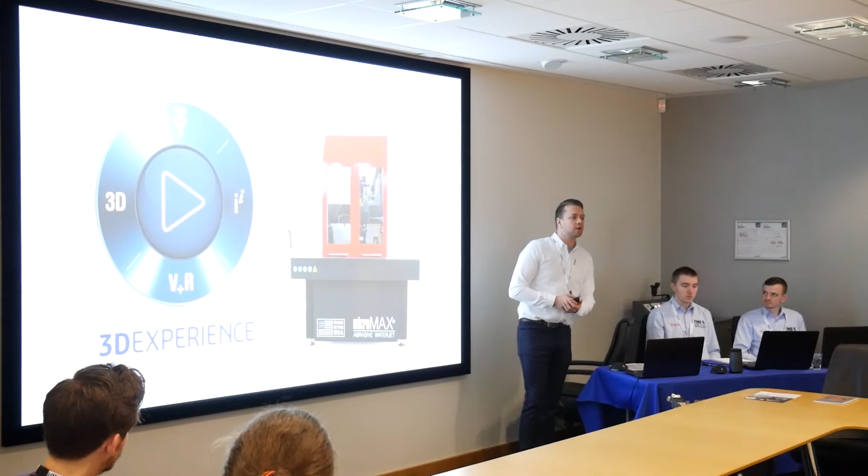Ciao everyone, and welcome to What's New in SolidWorks 2020. I am Gianpaolo Bassi, CEO of SolidWorks. Every year, we hear from thousands of SolidWorks users like you, and we get amazing ideas, insights, and requests for what's next. So of course we listen very closely, and then we deliver.

Over this past year, you have told us you want full digital continuity, a seamless process that takes you from design to manufacturing faster than ever. You want the freedom to innovate more, and you want to work with increasingly precise simulation to reduce the risks of product failure. So we got our marching orders, and we acted on them.

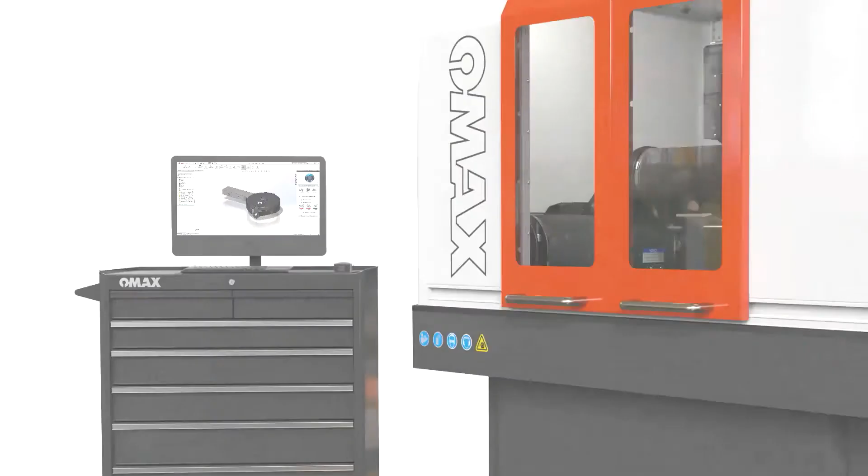And we are absolutely thrilled with what's new for 2020. It's all about digitalization and integration through a connected 3D experience platform to drive faster innovation while reducing the risk of failure. In SolidWorks 2020, you'll find three main ways we are giving you the solutions you truly want and need.

First, the 3D experience platform will deliver to you a connected design to manufacturing ecosystem, helping you manage every aspect of developing and delivering products, from ideation into the hands of your customers. You'll go from concept to completed product with unprecedented speed, and you'll do it easily and seamlessly with new and connected applications, both on the desktop and the cloud.

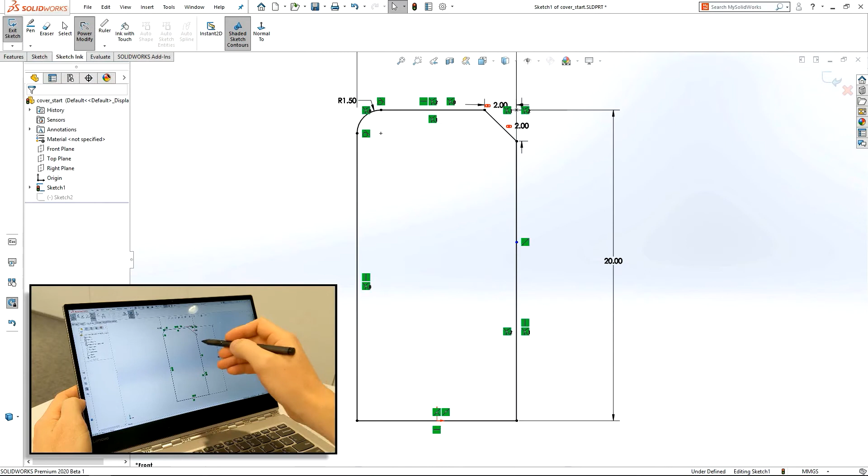We are delivering improved performance across the spectrum for stunning speed and unparalleled functionality. And finally, we are giving you streamlined workflows to accelerate time to market and reduce manufacturing costs, all while improving product quality. Get ready to dive in, discover, and get inspired by SolidWorks 2020.

Yeah, so thanks to Gianpaolo there introducing us. And I think what's really great about the SolidWorks software and how it develops over the years is so much of it comes from you guys. You using the software and giving us feedback to make subsequent releases better and better. I think that's a really good way of going forward. And a lot of what you're going to see today is all customer requested enhancements, which is really good.

Alright guys, so every year with these events we focus in on one of our customers' models and we use it throughout the day as the example file set. Last year you may remember we used the telescope, and for the veterans who have come along to a few of these events now, you may remember the Tracker motorhome that we've done as well. Well, this year's no different.

We've got the Micromax abrasive water jet cutter by the company Omax. Now, Omax are an American company, and they're largely considered to be one of the industry leaders in their field. And the way that they've achieved this is by using some of the great tools that we've got built right into SolidWorks now.

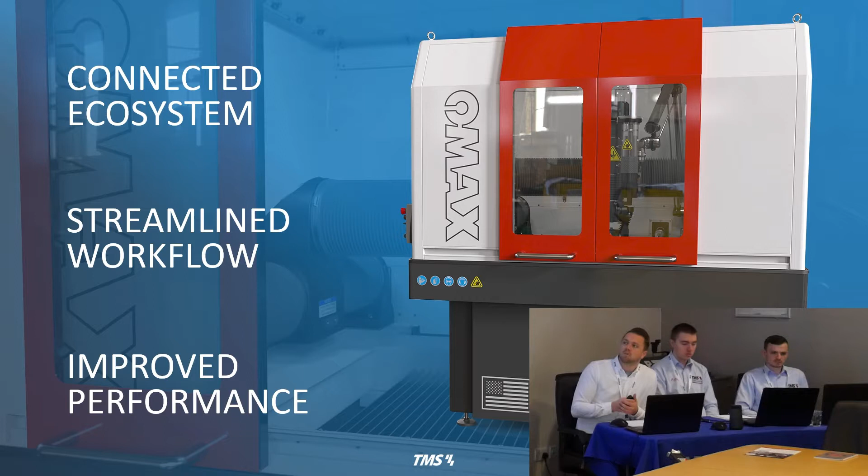So I'm going to open proceedings here by taking a look at how performance has improved for 2020. And where we're going to open on that is by speaking about detailing mode. A really nice enhancement that I'm happy to bring you guys and show you. Just looking around the room here, I can picture some of your drawings and I can see how it's really going to help you out.

So detailing mode is effectively, the way I like to think of it, almost like large design review for drawings. A couple of years back we introduced this function of large design review, and what it meant was if we had a particularly large assembly, we could open it, manipulate it, add notes, markup comments, all that sort of stuff really quick. It didn't matter how complex or how much was in that assembly, we could get in there and work with it fairly quickly and efficiently. Well, now that functionality's come into the drawing environment, if you can imagine, and that's where this detailing mode comes in.

Let's just take a look at it. So in this little video that I've prepared, I've got a fairly complex drawing, and we're going to open this up in this new detailing mode.

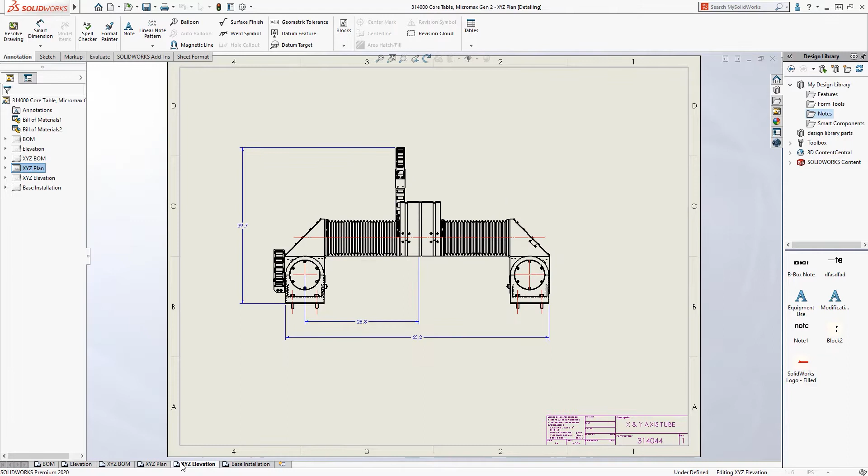Now with detailing mode, what you're going to find is that all your views, notes and annotations are completely attached and still connected to the 3D model. But the actual drawn views don't load the model, so they're really efficient and quick to work with, and it doesn't matter how complex the views are, how many sheets we've got, or how many configurations are in this.

We can add notes to it. As you can see here, I'm using the new note palette, dragging some notes in and dropping them in, company standard type notes. And equally, if I wanted to type those notes in, it's just as quick to do as well.

Now the sheet's starting to become a little bit crowded, and just as you would do with a fully resolved drawing, we can manipulate the views, reorganize our dimensions, delete them, edit them. So there is a whole lot of functionality available to you in this detailing view, and any minor edits can be carried out really quick and efficiently.

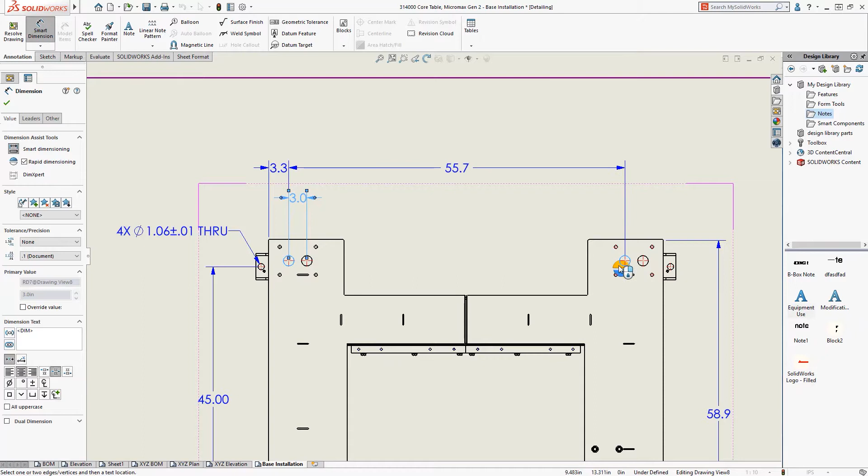So what we're doing here is we've started a new sheet, again just as we would with a standard fully resolved drawing. We'll add the new sheet, rename it, toggle through existing sheets. What's really nice here is that any feature you see, either in the toolbar or by clicking on something, if it's not grayed out, it's available to you. It's not like you click something and it says you need to load the drawing in for this. So it's a really useful tool, packed full of functionality.

Now as we go through here, what you'll notice is that we're using revision tables, symbols, we can use clouds, we can use different fonts. Basically all of this is open to us, and we're not going to lose any of the functionality of adding or editing any of our work.

And finally, just as you would expect, when we do finish this drawing off and save it out either as a PDF, a DWG or a DXF style format, it doesn't matter how we open it going forward—fully resolved, in detailing mode again, light view, or any of the other modes available for drawings now—any notes, anything we've edited whilst in this detailing mode is going to be there and available in that drawing when we reopen it.

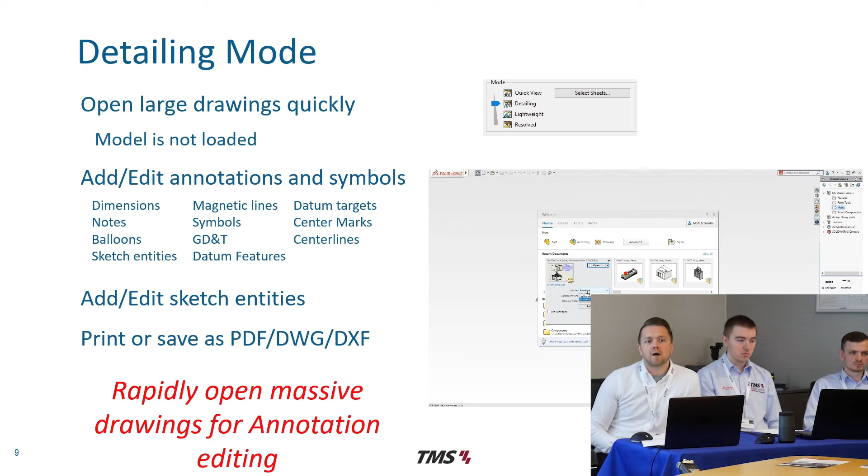So that is detailing mode, and the whole focus around that is if you're using complex assemblies, making complex drawings, and you've got some minor design edits or review to do, it's a great function to have. And I happen to know this was one which came from what we call internally an SPR, something that went to a development team and they incorporated off the back of a customer request. So really nice to see that.

Okay guys, moving forward here, what I'd like to do is rewind a little bit. Last year I actually presented this very functionality that you're looking at. So this is a 2019 feature. You're thinking if he's thrown them in already, there must not be much else to show us.

But the reason I'm rewinding here is because this tool we added, this large design review edit mode, really moved the game on in terms of what we could do with large assemblies quickly. Using large design review edit mode last year meant you could add mates to new geometry, change configurations, and move components around in your assembly. And again, it wasn't loading in all the reference components, so it was really quick to work with.

For 2020, again, the game has moved on even further. Now if you're using this large design review edit mode, we can add in different patterns. So component patterns can be added using this mode. We can also add mates to existing geometry now—you couldn't do that before. So if you brought something new in and wanted to mate it to something existing, you couldn't. Now you can.

And then we see this term, delighters. This is one we've used in this presentation a few times over—it's catchier than saying small enhancements, but they make your day-to-day workings all the smoother. And it's really the kind of things you would expect: copy paste is now supported, drag and drop supported, tab shift tab, which I use a lot for hiding and showing components, is supported in this mode. And we also have access to zoom to selection now. So yeah, just really nice little pieces.

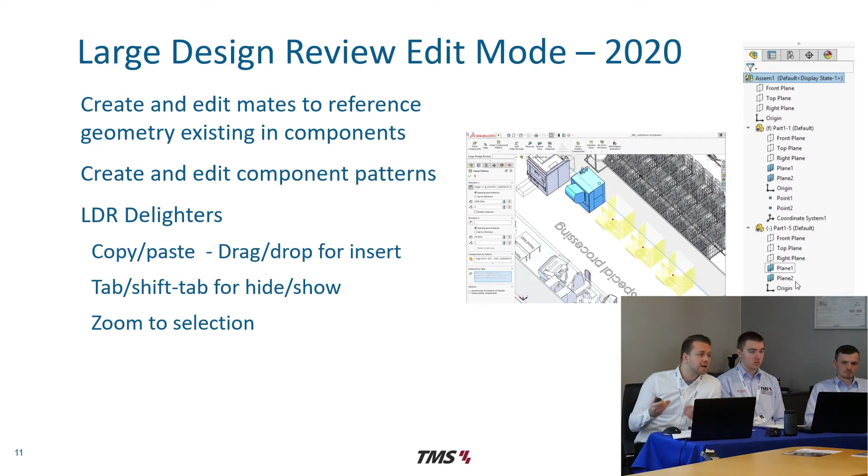Now where I'm going to finish up this section, guys, and get us on to another presenter, is with envelopes and external references. When it comes to envelopes, this is functionality we've had in the software for a couple of years now, but they're moving the game forward in terms of how you use these and how they really enhance collaboration with different team members.

Let me show you with a practical example here. When we're working on a complex assembly like this Omax water jet cutter, one problem is we often have multiple team members working on it. The current workflow would dictate that you'd need to create duplicates of this assembly and give that off to them, or break the link between two different files, give that off to them, then bring it all back together. Well, by using this new envelope functionality, what we can do is essentially envelope these components.

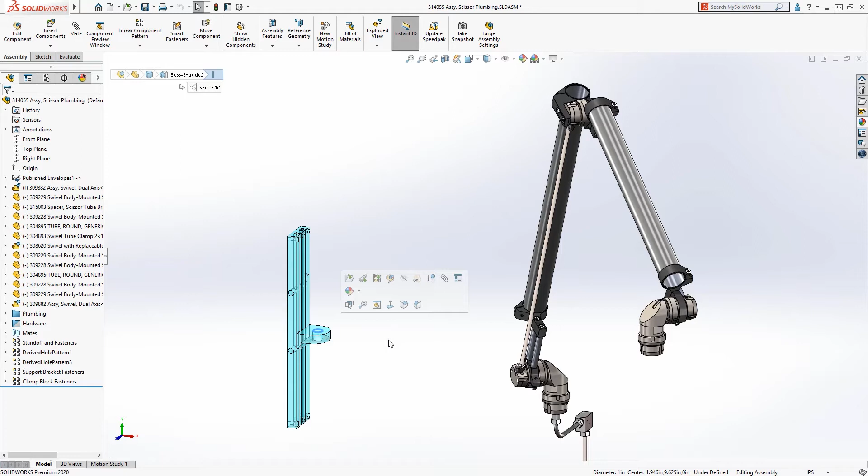We can create separate batches of them. These batches, in this case this kind of pipework system you see, we could pass off to a colleague, they could do some work on it, finish off whatever they need to do, pass it back to us, and everything comes back seamlessly in our tree, because SolidWorks knows it's an enveloped component. So the focus here, guys, is being able to work in collaboration with your team members faster and easier. You don't need to create duplicate assemblies, you don't need to bother about the management that comes along with that, which can be tedious and difficult at times. So enveloping components is all the more powerful in SolidWorks 2020.

So guys, we kind of flew through that one. That was the improved performance section. Now we're going to have a look and see how the workflow is becoming more streamlined than ever with SolidWorks 2020. And with that, we'll go over to Kieran and let him show you.

Now, again, to break this down into some bite-sized chunks, we've broken this down a little bit further, and we're going to have a look at the assembly improvements, then the part, and then the drawing ones. But we'll start off with the assembly ones that we have, and there's a good number of them.

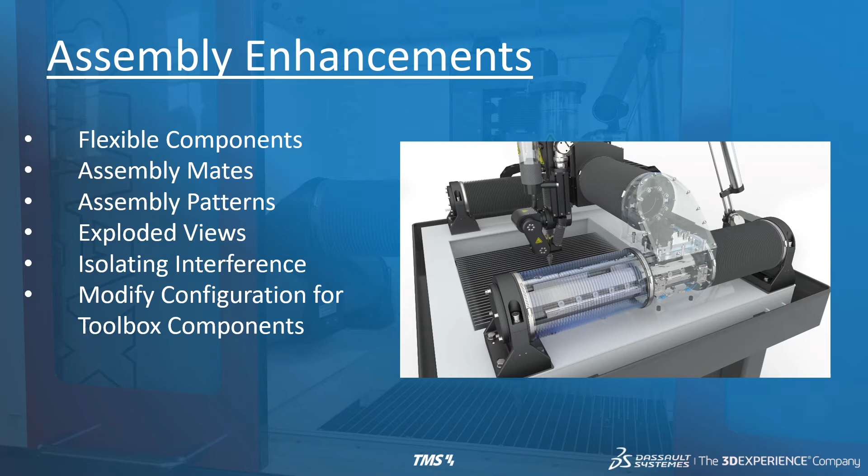We're going to start off looking at flexible components, and this is actually one of my favourite enhancements that comes with 2020. It really adds a great bit of functionality to your assemblies. But let's see what it's all about.

Now, with flexible components in our assemblies, I'm pretty sure most of you by now have commonly used flexible assemblies in order to get movement within your top level assemblies, that sort of idea. But how can we go about doing that for single components, the likes of any bellows, springs, things like that? How can we go ahead and get that geometry to update with any moving components in our assemblies? Well, that's basically where this feature comes in. But let's take a look at it.

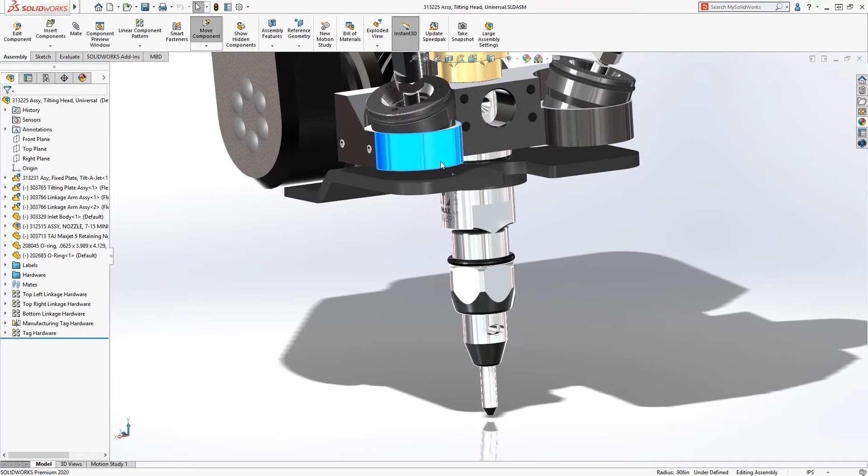Now, to take a look at this one, we've got this section of the Omax water jet, just the tilt-a-jet head of it. The way that it works is it actually rotates round at calculated angles in order to offset the taper of the abrasive water in there. So you can see how the mechanisms come into play at the top level assembly.

Now, like we said, in order to get this functionality, we do need to have a number of sub-assemblies in there which are made flexible. But again, how do we go ahead and add in some flexible components? For example, if we go ahead and add in some bellows in this case to protect the moving parts, make sure they're not going to break, anything like that, how can we go ahead and make them flexible?

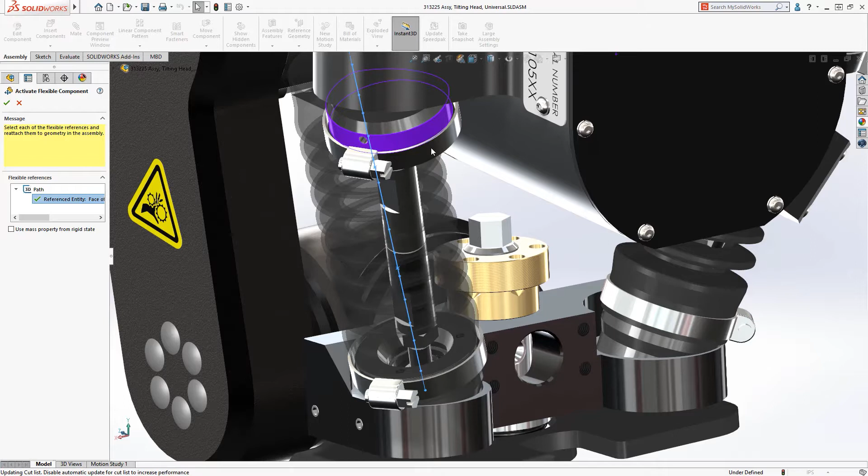Well, if we go ahead and add those in, what we now have when we select the component is this option to make part flexible. The way that it works is we can go ahead and select the reference that we want to go ahead and update with our assembly. In this case, it'll be the 3D path of the bellow itself. And then what you'll notice when I click OK is that the geometry starts to update.

Every time I go ahead and move the assembly after that point, the geometry starts to update with that. Likewise, we could go ahead and do the exact same for the opposite bellow here, again just using the exact same process, making the part flexible and selecting the reference that we want to update the geometry.

Now, it doesn't matter whether it's live hinges or springs or bellows, anything like that. The opportunities are pretty much endless with this one, guys, and it's a great way of actually starting to visually validate your models when it comes to the top level assemblies. It makes it a lot easier to see.

Now, a few additional points when it comes to flexible components. As you saw, we can go ahead and remap those external references, like the 3D path of the bellow itself. But what we also saw there was that multiple instances are actually supported as well, so we went ahead and applied that flexible part to both of those bellows. However, it's still just looking at one individual part in there. It's not going ahead and creating any duplicate files, duplicate configurations or anything like that. It can simply use one part and update them independently depending on how that geometry changes.

The other useful one as well is we can go ahead and control the mass properties in there, because of course as the geometry starts to change, the mass of the component could potentially change along with it, and of course that wouldn't happen in real life. So what we can do is go ahead and set the mass properties of that specific component to simply reflect its rigid state in there. So again, we're not having any change in masses in the top level assembly. And finally, we do also have some custom property support as well.

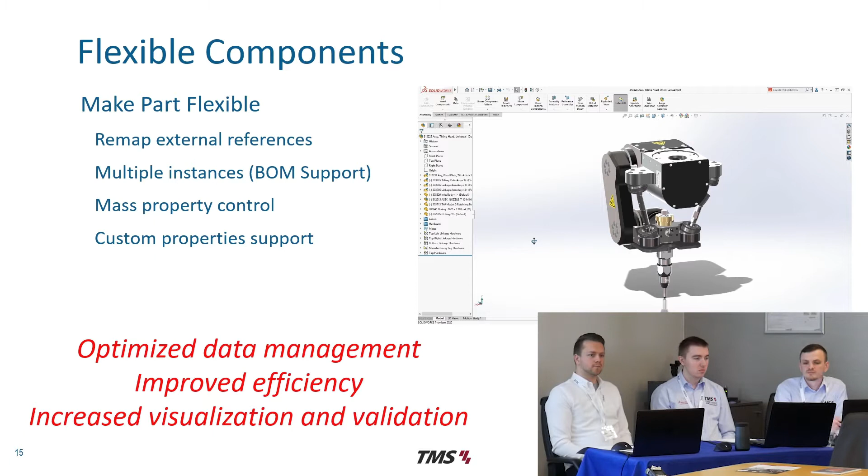The next little bit is looking at the improvements that we have with our assembly mates, primarily looking at our Quick Mates toolbar here. And we've got a few nice little additions with 2020. That being, we now have the incorporation of our limit mates in the Quick Mates toolbar. Likewise, we also have our slot mate with our position constraints as well.

Same as the slot mate, we'll also have the width mate with the constraints as well. A flip alignment pop-up button. And we also have a flip alignment for our width mate in the right mouse button click now, just making it a little bit easier to control.

Now, just to see these in action, again, we've got a little example for you here. Now, the Quick Mates toolbar has actually been around in SolidWorks since 2014, and it's a great way of trying to bring your assemblies together, focusing on the graphics area alone.

Now, if we go ahead and look at this example, what we want to do is go ahead and mate this washer into place with this slot. Now, with the slot mate on the Quick Mates toolbar, we can go ahead and select it and position that about the slot as we want, in this case in the centre.

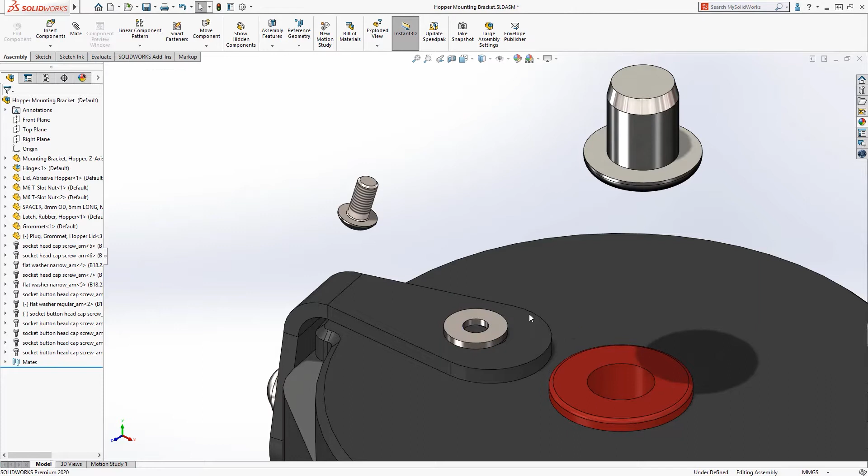We then want to go ahead and mate this bolt into position, and we've long been able to do this with the centre profile mate. But up until this point, we've had no way to flip it without going in and editing that mate. But now with this flip mate alignment pop-up, we can go ahead and do it directly from the graphics area.

Then, just like our slot mate, we can then go ahead and add our width mate in here, and again, we can control that positioning from this constraints drop-down. Now, again, we can use this flip mate alignment in order to flip that round, because up until now, what we need to do is go ahead and suppress that out, rotate the component round to the right direction, and then unsuppress it again so it suits what we need. And as we mentioned, we also now have that flip alignment in the right menu click as well.

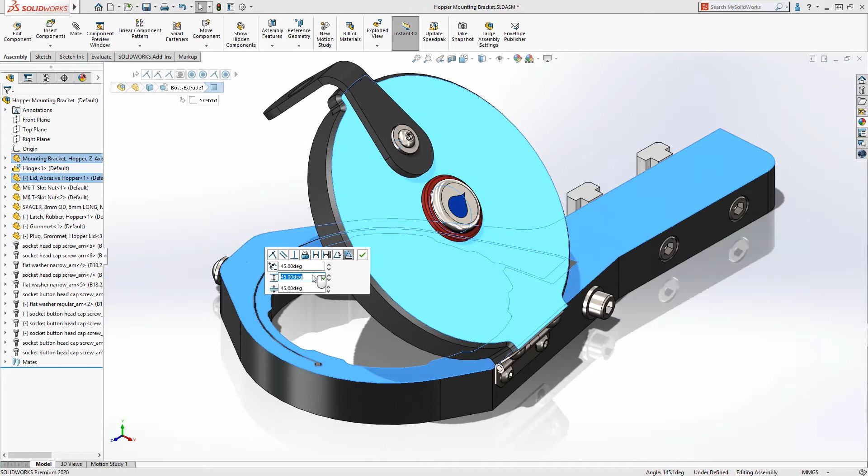Finally, we want to go ahead and add a bit of flexibility to this assembly so we can see how it moves. And from a Quick Mates toolbar, again, we can make use of these limit mates here, where we can quickly and easily add in our minimum and maximum values, so we can then add in the travel of the component that we would expect in real life as well. And again, we can go ahead and check that out just to make sure it's working correctly.

So again, with these little additions, it's just adding a few more options in there, making your assemblies come together that little bit quicker, and it's a little bit more user-friendly as well.

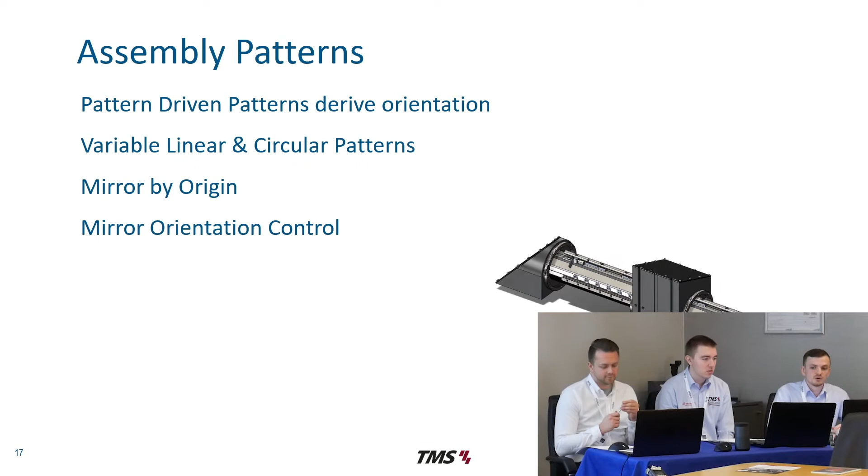Next up, we've got our assembly patterns. We've got a few little additions here. Instead of explaining all of them, we're just going to jump right into the example. Component patterns are a great way of bringing multiple components into your assemblies without having to mate them all into position one at a time. And the first one we're going to look at is the pattern-driven pattern.

Now, with 2020, what we have is the ability for Hole Wizard holes to detect the orientation when it comes to patterning. Up until now, you needed to create multiple patterns or skip instances to achieve that. But it now takes into account that orientation, so it makes it that bit quicker again.

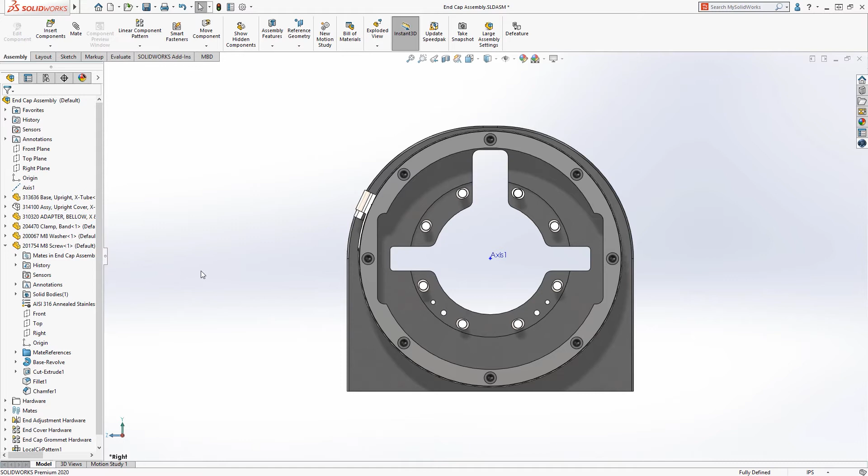Just like with our component patterns, we also have some enhancements to our circular and linear component patterns, in that we can control each of those individual instances. You may be familiar with this from the part environment, but it's just recently been added to the assembly environment as well. So if we've ever got components at irregular spacings, we can nicely and easily manipulate that within one pattern command instead of multiple. Again, it just makes it a bit easier.

Lastly, let's look at the mirror components pattern. Up until now, we've had the options to mirror about the centre of a bounding box, or even the centre of mass. However, sometimes it just doesn't get it quite right. Now, with SOLIDWORKS 2020, we also have the ability to mirror using the component origin. So if we've got any asymmetric components or anything like that, it makes it that little bit easier to align it correctly.

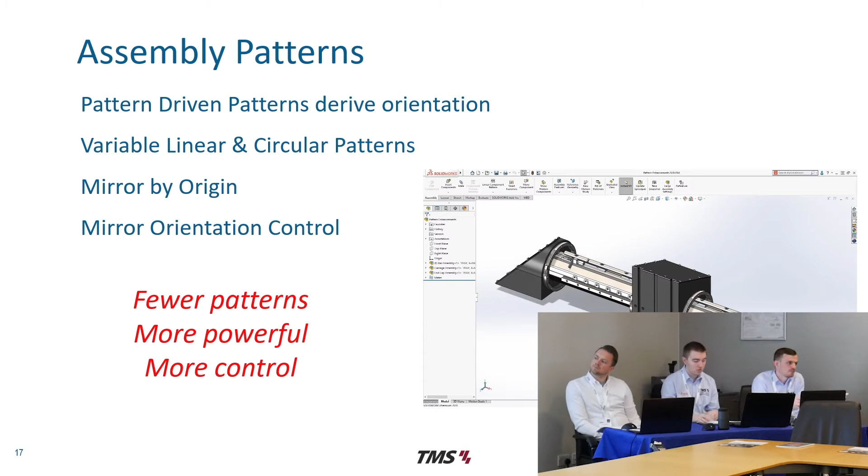As you saw from the image there, we also have some new positioning toggles at the bottom, which are more visually appealing in showing the correct orientation. So again, we can now create fewer patterns as they're more powerful, and we have more control within them as well.

The last section when it comes to assemblies are these little additions at the end. We don't have videos for them all because, believe it or not, we'd be sat here all day if we did. What we'll start with is modifying configurations of toolbox components. Now we have a simple right-click on any of these toolbox components where we can create a new configuration, swap configuration, or even suppress out multiple toolbox components at the same time, making it a lot easier to customise your assemblies from one right mouse button click.

The next one is the reuse of multi-body part explodes. Explodes have been within the part environment for a while now, but what often happens is you have a multi-body part, you create the explode view, that's great. We put that part into an assembly, but we want to make use of that multi-body part explode we've already got. Up until now, you needed to create all of that again. However, with SOLIDWORKS 2020, we can now, with one check of a box, select to bring in this exploded part, or multi-part explode view, and make use of it in an assembly. Again, just saving that little bit of time when we're pulling our assemblies together.

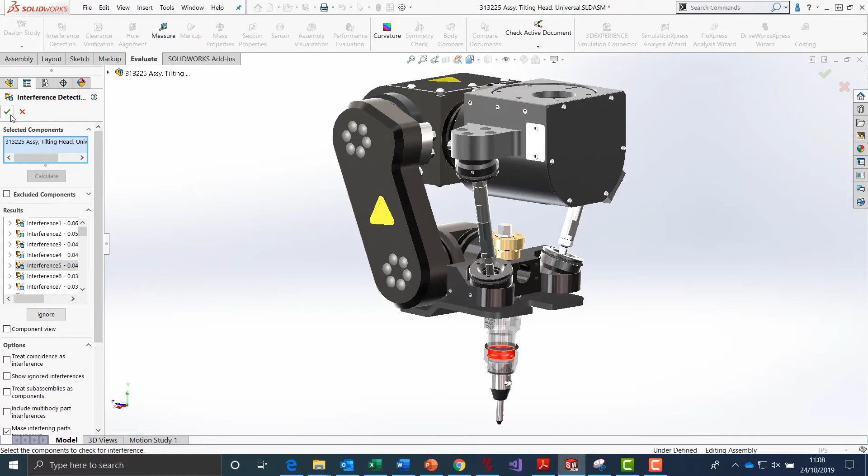But now, with a right mouse button click, we can isolate that interference when we click OK. So when I click OK, it's going to single out that interference that we have, so I can then look at those individual components and make some judgment calls - is that expected, is it not? Or I can even make some geometry changes right here in my graphics area. Again, it just makes that functionality a little bit easier.

Now, that pretty much sums up the assembly enhancements. Like I said, that flexible components one at the start is definitely one of my favourites, and if you ever get a chance to try it out, I'd highly recommend it. But now we're going to move on to the enhancements for parts, and I'm going to pass you over to Craig for that.

Thanks, Kieran. So where Kieran left off with his favourite enhancements for assemblies, I'm going to leave my personal favourite in parts to the end, looking at structural systems. I'll take you through some enhancements to the user interface when working with parts, look at enhancements for both touch-enabled and non-touch-enabled devices, how we can add in markups a little differently, repair some fillets when we get warnings in our tree, and that sort of thing.

So let's get started looking at the user interface. The UI in the part environment has had a couple of enhancements just to make day-to-day use that little bit easier. Let's get started with a quick demonstration.

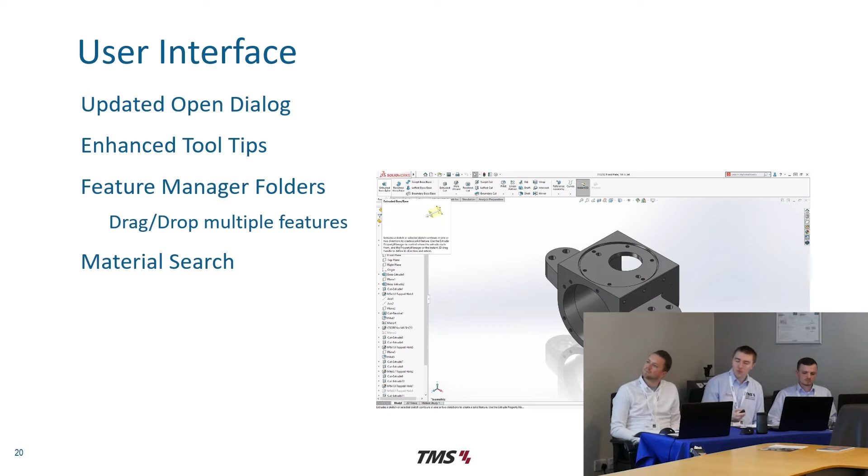When opening up a file, the file open dialog box is now a little bit wider, so we can see all the file extensions, and you can rearrange them to make it easier to find the file type you're wanting. We now have a new mode selector for how we want to open our part or assembly, with quick options to the side relevant for each mode. Users also like to customise their interface, so now when showing and hiding different tabs, there's a new flyout appearing at the top of the screen to see them.

Customers also sometimes wonder, when new to using SOLIDWORKS, what some features actually do. So there's now new previews for a number of features, but I'll explain that a little more in the next slide, where we'll show some examples.

Customers also like to create and use folders in the Feature Manager design tree, and now you can drag multiple non-contiguous features at the same time into that single folder.

When applying a material, sometimes it can be hard to find the exact one, not knowing which folder it's in - is it a SolidWorks default material, or have we created our own custom material? Now there's a new search bar up at the top, so you can type in a couple of letters for a material and get access to it quicker. Particularly useful if you're doing a simulation, just to make picking that material quicker.

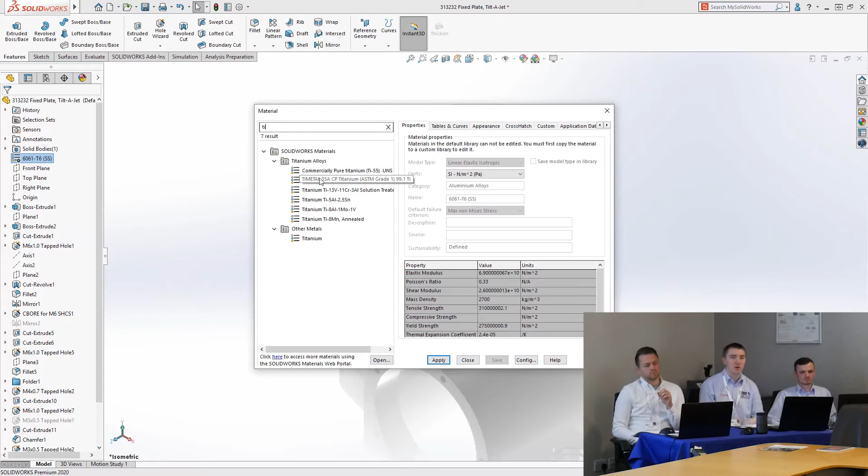So a couple of enhancements just to the UI side of things, to improve user interaction and speed, allowing you to get to your work that little bit quicker.

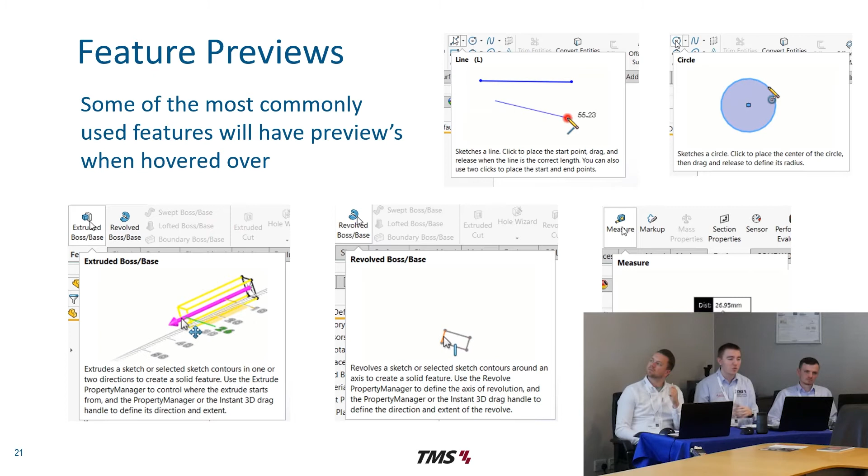I've got an example of some of those features that have previews - what they'll do is, when you're new to using SolidWorks, if you hover your mouse over a number of different features, it will start to play a little 5 to 10 second animation showing what exactly that feature does. So if you came from another CAD software, you might wonder what a revolve is doing, or what the measure tool is used for. It will give you previews of them, and you'll get more familiar with the software as you go.

Sketching in SolidWorks also has a number of enhancements, both for people with touch-enabled devices and non-touch-enabled devices. Let's get started with a little demonstration of that.

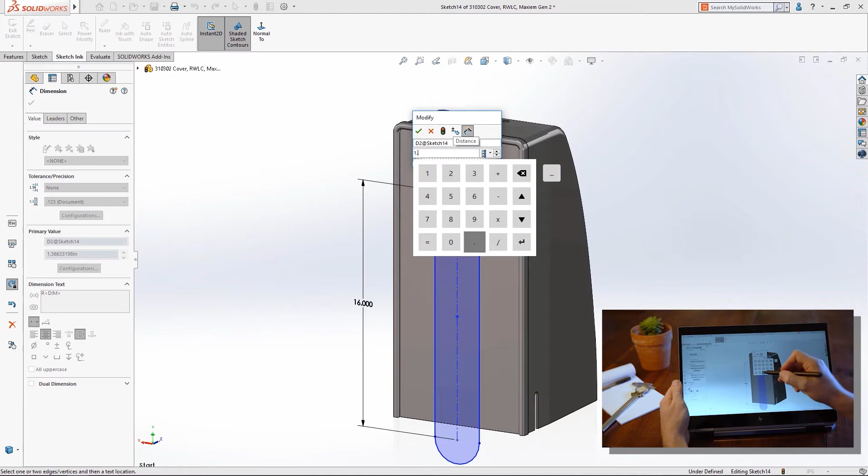SolidWorks 2020 introduces new sketch enhancements, so let's look at some of those. When using a touchscreen device such as this HP ZBook Studio, we can quickly and easily draw - with enhancements added in 2019, this slot, just by drawing it with our pen. But when adding dimensions, we still had to enter them with a normal keyboard. Now in 2020, we can just use the on-screen keyboard to type in those dimensions, making it that little bit easier.

Making edits is easy using the command manager up at the top, and we can customize that as we need, such as using convert entities, or adding quick access to fillet and chamfer. But we can make that even easier in 2020 using the new power modify option, so we can quickly trim out material by starting our sketch with a little squiggle when drawing.

We can draw a little curve, a little straight line over an edge, and that will automatically add in the fillet and chamfer, and we can jump between the two as needed. Again, we'll start with a squiggle to remove material, or if we need to split an entity, we just draw a little X on top of that sketch entity, and that will split that line.

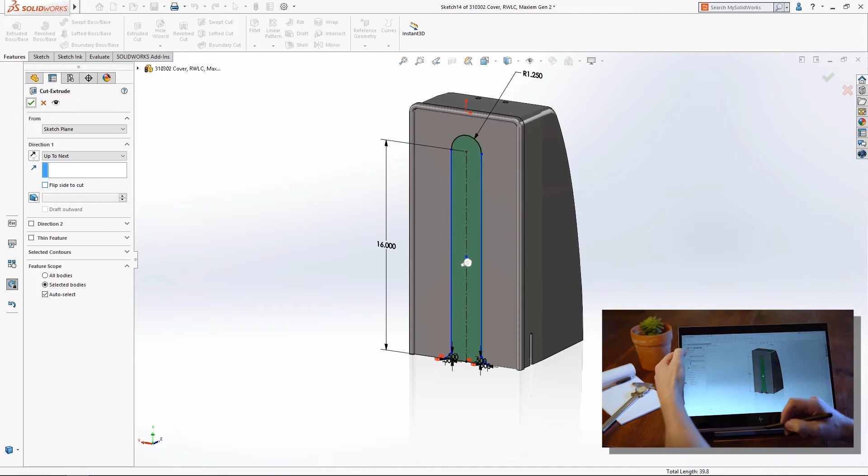So we've got our shaded contour, and if we start with a double stroke, we can create an offset of a particular entity, or if we do that over a shaded contour, it will create a contour that we can then use our cut extrude to cut away some of the material we might need.

I'm then going to look at the curvature of the back section of this part using my zebra stripes, and we can see that it doesn't quite line up perfectly.

Now when I edit that sketch, we've previously been able to add things like tangency or curvature continuous, so our C0, C1 and C2. But now in 2020 we have the option for C3 continuity to make that edge a little bit smoother. We can see that nice and easily when we show the zebra stripes.

But maybe I didn't quite like that change, so I'll hit undo a couple of times, and then maybe redo, jumping back and forward as I'm making design changes. In the past, if you hit undo, then come out of a sketch or feature, you'll probably have noticed that redo button's been greyed out. So there's been a number of enhancements to both redo and undo, so you shouldn't lose any of your work when jumping back and forward in and out of multiple features.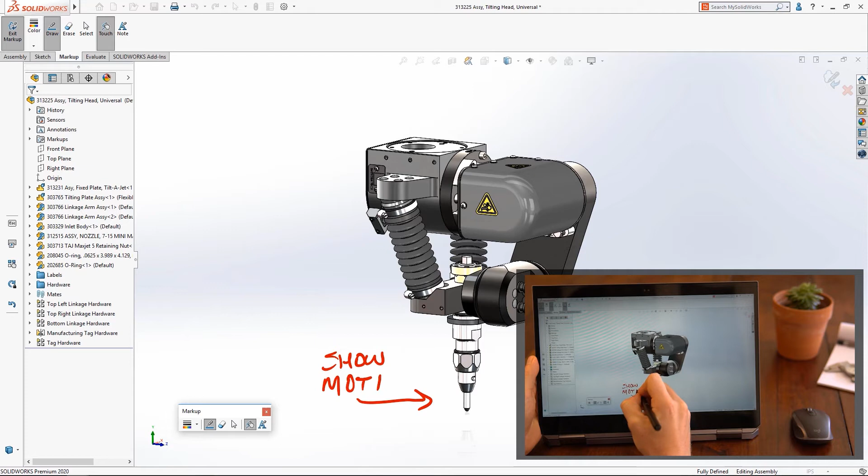Markups are a great way to communicate and collaborate directly inside a SOLIDWORKS file. With SOLIDWORKS 2020, accessing these tools is even easier than before, with its own toolbar up at the top and a command manager tab to go with that. You'll notice while in touch mode, the icons are now a little larger, so it's easier to hit on the first try.

As always, markups are stored in the markups folder on the left of our Feature Manager design tree, and we can quickly orientate to the orientation a particular markup was created in, should we need to make changes. We can highlight multiple markups at the same time, and once finished we can export that markup to additional formats, like PDF, JPEGs, TIFFs, those sort of things.

What we can now do in 2020 is create our markups in the drawing environment. Previously it was limited to parts and assemblies. So in the drawing environment we use that same intuitive interface we had in parts and assemblies to start drawing and making changes as needed. We can also hide and show particular markups from our feature manager design tree, or from our heads up toolbar we can hide and show all of those markups at the same time.

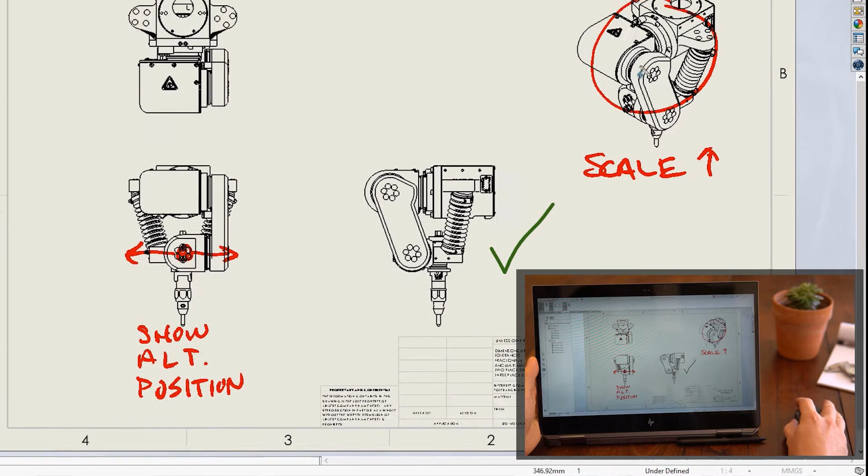But say we don't have a touchscreen device, now in 2020 we can just use our mouse, pick the colour of the markup we want to draw, pick the size of our line, and then just draw away with our mouse, making it that bit easier to get markups in there. I've seen a lot of customers sending us drawings, data, or issues where they'd use the snipping tool in Windows, then stick it into Paint, trying to draw on particular bits.

Why not just do it directly inside SolidWorks and export them once you're finished? It makes things that bit easier without having to open up a separate program. That's enhancements to markups, which I think more and more people are going to start to use because it makes drawing things that much easier.

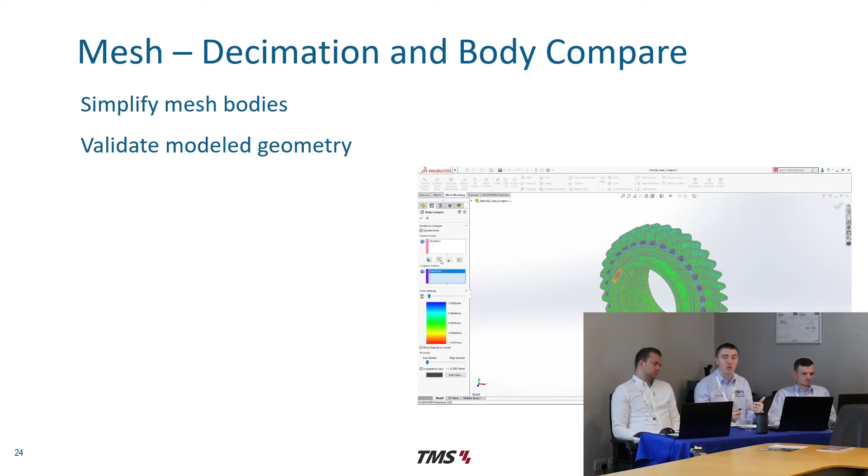A lot of customers end up also working with mesh data. Maybe you've got a scan that you've done yourself, or a client's created a scan and sent you some mesh geometry that you've got to then work with in SolidWorks. There are a couple of enhancements to help with performance when working with it, and the ability to directly edit that mesh geometry if you don't want to create a native SolidWorks file.

We might have something like this complex mesh body that was created from a scan of an Artec 3D space spider, and even with some of the most advanced computers it can be a little bit difficult to work with these.

But now in 2020 we can use a new decimate mesh body feature, insert a percentage decrease, and it will decrease the complexity of that mesh without actually losing any of the physical geometry. We'll see on the right a little preview of the before and after, just to make the performance a little bit better.

When we want to actually create a native SolidWorks model to go with it, we can now use the new tangent face selection option, which allows us to pick up those tangent faces in the middle, allowing us to create an axis in the centre, which we can then use for some of our revolved features to create our 3D geometry.

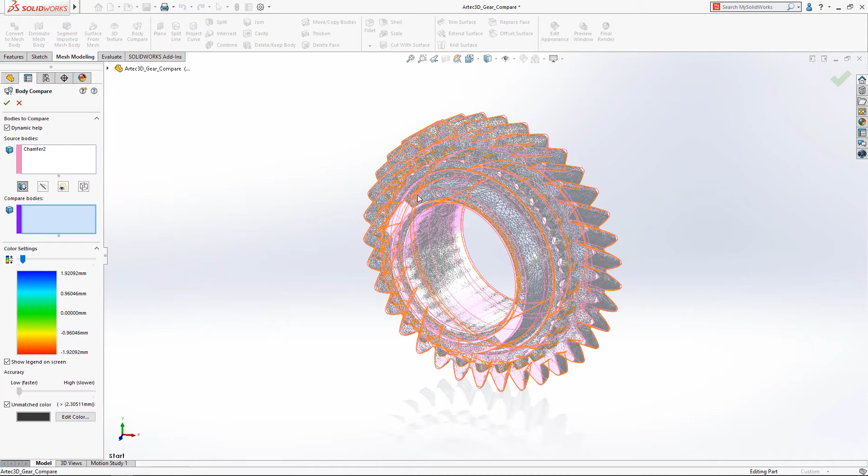Once I've created that 3D geometry, I might want to compare that to the original mesh data. So we can use the new body compare option, select our mesh geometry and the model I've created, and then we get a visual heat map of how those two compare with each other, showing what faces or features I might need to edit slightly.

We can see those sections, particularly in red and blue, that are standing out where we might want to make a little bit of tweaks - just 1 or 2 millimeters of difference between the two. So tools like decimation and body compare just make working with mesh geometry in 2020 more effortless than it was previously.

What if we don't want to create our own geometry? What if we want to just directly edit the mesh geometry that we have? There are a couple of extra tools where we don't need to convert anything beforehand.

The need to directly edit mesh geometry, such as this STL file, is becoming more and more common with customers. In 2020 it continues to expand on that already rich mesh editing feature set, so we can now apply fillets in the same way we would with a native SolidWorks file, and edit that feature to convert from a fillet to a chamfer or vice versa as needed.

2020 now supports more advanced editing tools, such as if we want to increase the radius of this particular surface - I can use my familiar surfacing tools, such as creating an offset surface, extending that surface beyond my current model, and using the trim surface operation, selecting the new surface, my original surface, and trimming out that middle section, therefore increasing the radius value I had in there.

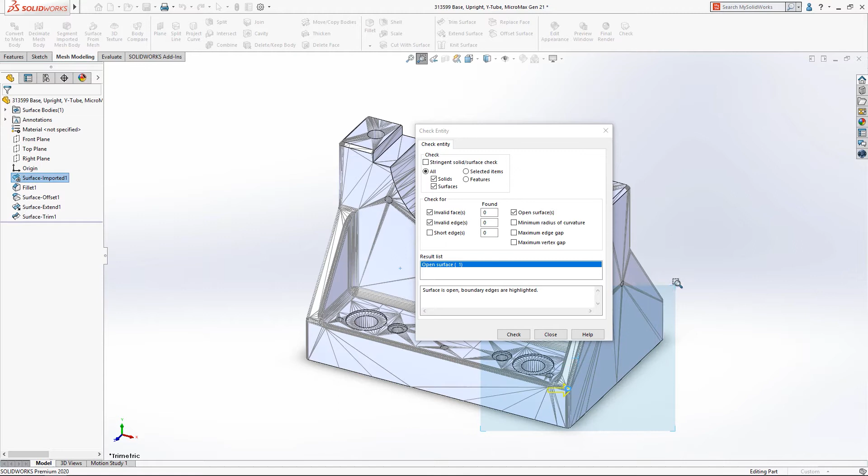Sometimes though, working with mesh files and imported bodies, we can have some issues. Using things like the check entity tool, we can find that we've actually got a small hole and a gap down at the bottom right of my model, so I can use the delete hole option to get rid of that hole.

With the 2 holes on that right face, we can now use in 2020 the new option for delete and fill inside with mesh geometry, whereas previously we could only delete the hole, we can now automatically have SolidWorks fill in that gap. These are a couple of enhancements that were previously available in native solid files that are now available for mesh when directly editing them, such as STL files. So SolidWorks 2020 just gives you more powerful tools that make editing that mesh geometry familiar and easy.

What I'll then look at is how we can potentially fix an issue we can have, particularly with things like fillets.

We've probably all seen that once we've created some geometry, we might need to make a change to the model in a previous state, maybe a couple of the features at the start of our model. You'll make that change, it looks fine, you'll roll on your feature manager design tree, and you'll notice you've got a couple of warnings because you've got dangling dimensions, dangling relations, or it's lost a reference. One of the common ones is with fillets, when you're making changes, it will lose the references.

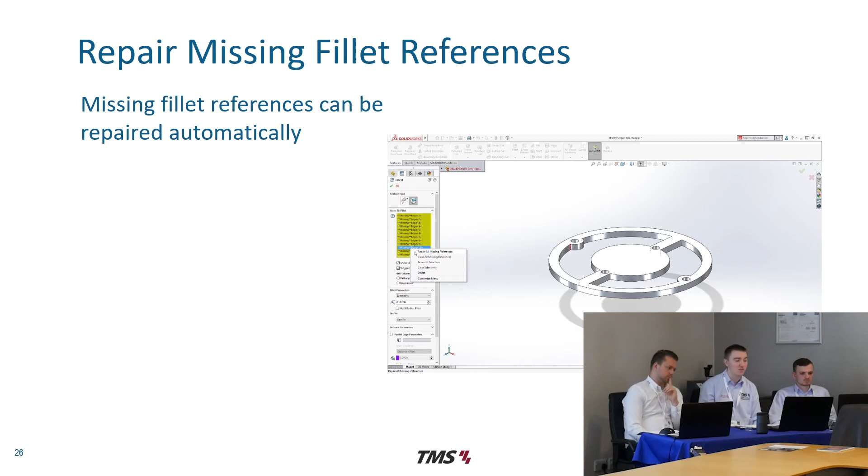So we've got a new option to try and help fix that a bit quicker. Let's take an example of this.

I'm going to open up one of my parts and edit how that was originally created. Rather than creating this with a single extrude, I'm going to split it up into an extrude and an extrude cut, just so when I add in multiple configurations of this part I'll have more control over both the extrude and the extrude cut.

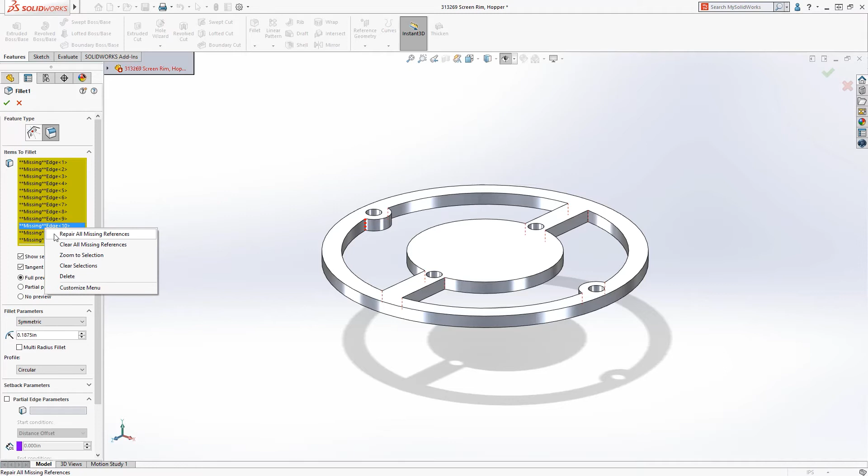We can do that quite easily by using our contour selections, using the same sketch twice, and in my cut extrude selecting the two contours I require gives me the exact same geometry. It rolls to the holes, everything looks perfect, but dragging it past the fillet, it's lost the edge references. Even though the geometry is physically the same, the edge references have all changed, and previously we'd have to manually select all of those edges again.

But in 2020 we can now right click and select the option where it will automatically find those missing references, because it knows the geometry is physically the same, so it knows where those edges should be, and it makes fixing them a little bit easier. It saves time from manually having to find all those references again, which can be a little bit annoying.

Then we have a couple of enhancements to surfacing inside SOLIDWORKS 2020. Let's get started with a little demo for this one, straight in there.

The cover of this rapid water level control needs a stiffening rib and also a little gap for a warning decal. The new design needs more clearance for internal components, so we can use an offset surface for that. But not every surface might offset perfectly the first time, and previously that would stop us in our tracks and we'd have to try and fix that issue.

But now you can just right click to clear any of those surfaces that would have failed, and we can continue working with the rest of the surfaces and resolve those other issues as and when they come up when we're making other changes to the model.

To finish up the model, I'll start doing some trimming operations to tidy up the other faces, remove some material inside for the warning decal, pushing that a little further so there's more of an offset, and applying a fillet just as we would normally, to get rid of those sharp corners from doing the offset.

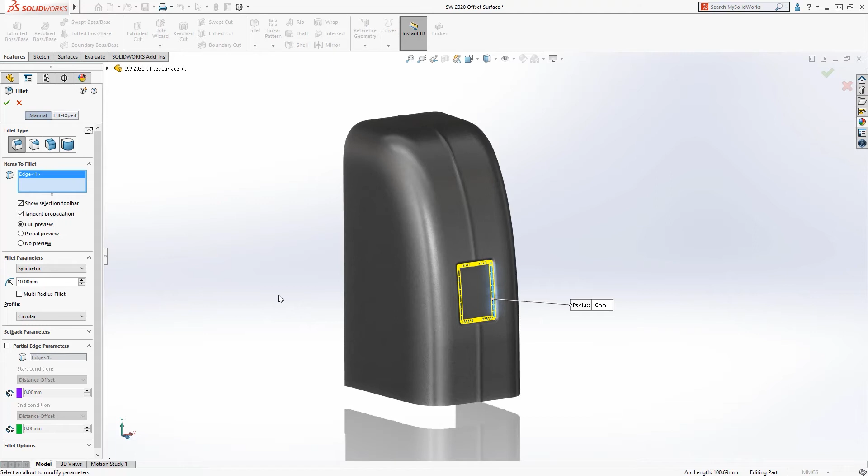What I then need to do is create a surface thicken, to get some thickness in that geometry. Previously we could only thicken it in one direction or the other, but now we've got the option to thicken equally in both directions.

This makes creating that bit easier, because previously we'd have to do it in one direction and then create a separate, more complex feature in the other direction. Now we can choose that thickness in the middle, which finishes off our model, and we've added a little decal in there for the required warning. So those are just some small surfacing enhancements to make working with surfacing a bit easier.

We've then come to the big section for parts, and that's the structural systems.

This is actually my favourite enhancement for the part environment, because we can end up creating a lot of geometry from very little information. This whole model on screen is going to be created from just 4 planes, 1 axis, and 2 or 3 sketch points. There's almost nothing I've actually created beforehand, yet we'll end up creating quite a lot of geometry from that. This was in there in 2019, but it's had a lot of enhancements to make it much easier.

So let's get started. Structural systems was introduced in 2019 and provides a more flexible method to create weldment structures with or without the need for complex 3D sketches to define all of our members. We'll review some of the capabilities of structural systems as we go through, and also look at a lot of the enhancements that have been made in SolidWorks 2020.

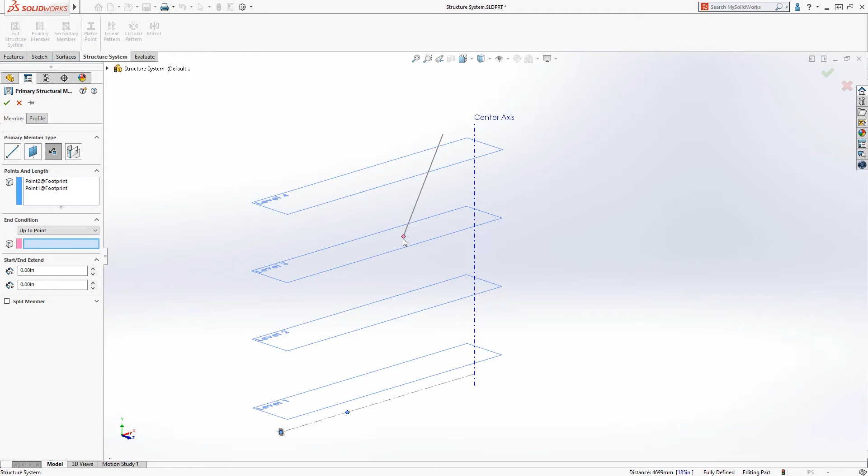Members can now be created between pairs of sketch points or chained together to create a series of members along a chain. And we have a new up to point option, which allows us to create members that converge at a single reference point. The new up to plane option will create all those members finishing at a particular plane, and we can offset that angle using a sketch line if we so require.

As introduced in SolidWorks 2019 as well, we had secondary members that can be added in using that new support plane option. And for these, a different weldment profile is going to be used. Top of these members needs to be aligned a little bit different, so we can just alter that pierce point, get that positioned up with the plane as we require.

In SolidWorks 2020, primary and secondary members can now be split during creation. Splitting can be done using dimensions, instance counts, or by selecting a reference such as a face, plane, or another structural member. And for this particular member, we'll maybe rotate it by 90 degrees just to get that orientation correct that we require. So just type in that 90 at the bottom there, get that rotated.

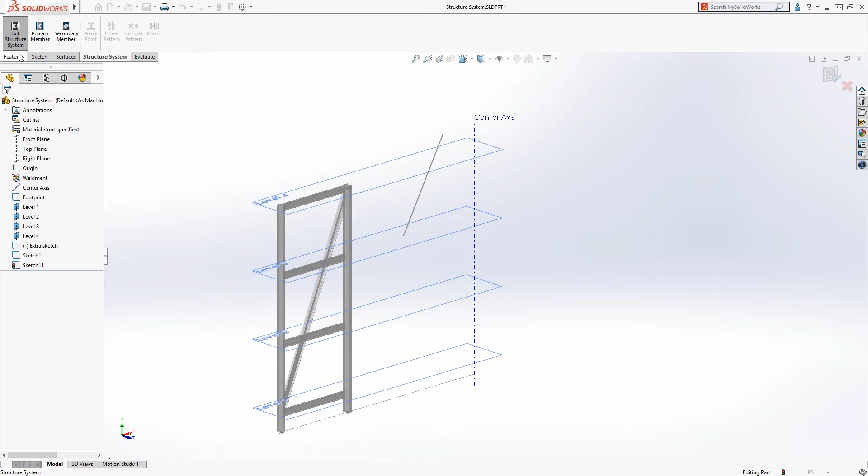When we're finished defining our structural member, the corner management tool will automatically kick in and allows us to define how the corner will be trimmed.

For simple corners, we'll define a planar trim with full contact to the intersecting members. For the complex corners, SolidWorks actually does a fantastic job of determining the trim tool as well as the trim order for the intersecting members. And if we hide out this vertical member, we can actually see what a great job SolidWorks has done at trimming those members where they meet.

To add in more members, we can create a circular structure using our circular pattern. Previously, we could do this by patterning a body, but now we have the option to pattern the actual structural system, and doing that will actually keep the integrity and all of the smart information from that structural system, which we can then use later on when we start to create additional members.

In this example, we're going to then add in a new structural system to define the perimeter members. These are added in using the support plane method between the original structural system that we created and the patterned members, and we'll use the pierce point to align those with the planes, similar to what we did in the last example, keeping everything aligned.

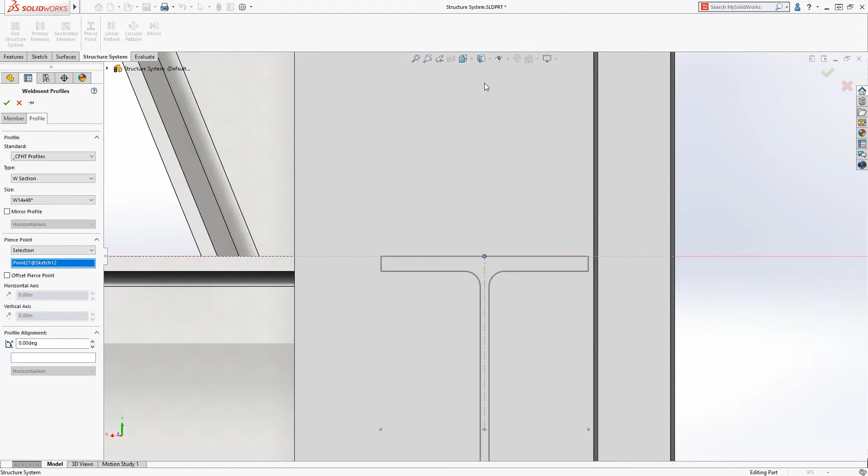Upon exiting of this structural system, the corner management tool will then determine how those corners will be trimmed, and this is where we would have got stuck previously in 2019, where we were circular patterning the body rather than the structural system. So selecting the structural system to pattern allows us to use those corner tools when we create the second and third members.

And then we'll just do that again, circular pattern to get those members added in, and that will finish up our model. So you can see it was nice, quick and easy to create quite a lot of geometry from very little information, and it'll be a lot easier than some of you might have used the normal SolidWorks weldment tools. You'd have drawn a really complex 3D sketch with all the different tiers, and you could have done it that way, that'll work fine, but it would have taken you a lot longer to get the same end outcome. So that's actually quite a nice enhancement in there in 2020.

So that comes to the end of some of the enhancements to the part environment. So what I'm going to do is take you through a couple of enhancements for the drawing environment inside SolidWorks 2020. Now, Grant obviously already mentioned at the start the new detailing mode. That's a great way to quickly open up your drawing and get access to the information quickly. What you can actually do is pair that with the new graphics pipeline.

The graphics pipeline was introduced in 2019, but it was a beta feature only for assemblies. The goal was to make parts or assemblies open up quicker, and when you're zooming around particularly complex assemblies with maybe thousands or tens of thousands of components, zooming, panning in and out, rotating around our model would be that much smoother.

In SolidWorks 2018, they added an option where if you're creating any bill of materials or other tables inside drawings, you could have everything be uppercase. There's now the option where all dimensions and hole callouts can also be made uppercase. So if you don't want some dimensions uppercase and some lowercase, causing a mismatch, you can have everything in block capitals if you want.

I'll now look at a little video we've got showing some examples of other enhancements to drawings.

When we've got our drawing, we might want to change the scale of some of those drawing views. We can easily do that down at the bottom right corner, selecting the scale we require, but sometimes we might not have the scale we commonly use in that particular list. You can now actually edit that list with a simple text file, and customise all the scales that are shown by default. If you want, save that text file out, give it to your colleagues, and everyone can have access to the same list.

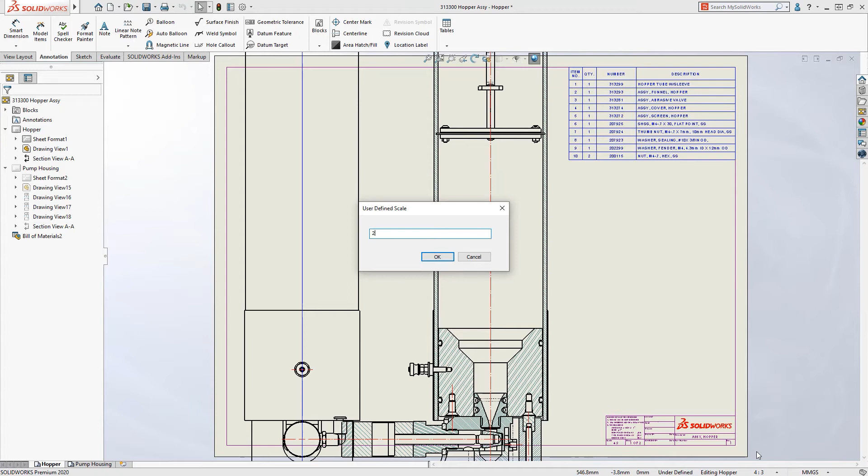If you don't want to edit that text file, you could, as always, open up the sheet properties and manually type it into each box to get your custom scale. But now in 2020, there's a new option: we can just click User Defined and get straight into typing our scale, hit enter, and it allows us to create our new custom scale with fewer clicks than previously.

Whenever we create something like a detail view, SolidWorks always wants to double the scale of our parent drawing view. In 2020, we now have the option of changing that scale while we're doing that on the left in the Feature Manager design tree.

We now have a new chain dimension option for selecting our dimensions, so we can select almost like a zero point, select our references as we go up or along the model, and it will add in each of those dimensions between those points. We can even add in an overall dimension by right clicking, and if we update, delete, or modify one of those other dimensions, it will automatically update that overall dimension or tidy up the other ones. If we want, we can convert that new chain dimension to a base dimension, or vice versa, easily jumping between the two.

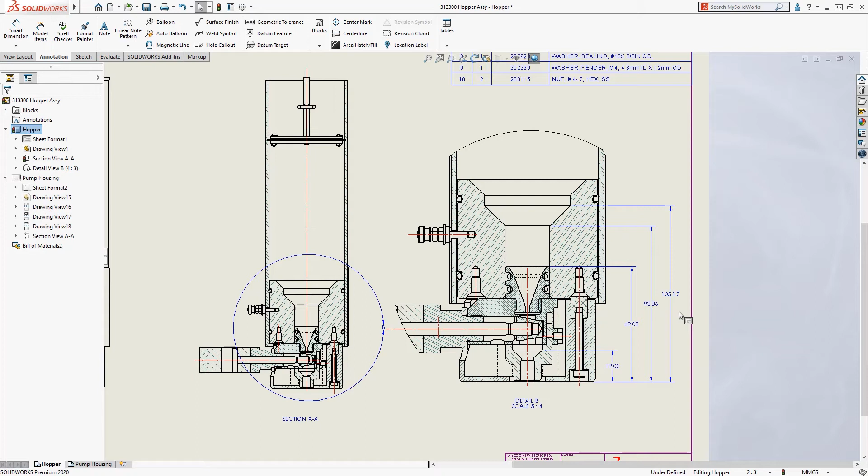I've finished this particular drawing sheet. On my other drawing sheet, I have a part view down at the bottom right. This has multiple positions, maybe casted and machined parts. We could always create an alternate position view of assemblies previously, but now you can have alternate position views of parts. So if you have a multi-body part that's moving, or just want to show alternate positions of a particular part, we can now do that in the drawing environment, and quickly add in a couple of dimensions to show how much variation and movement there might be. So that's a couple of enhancements to the drawing environment, just to make that day-to-day use a little bit easier.

What we're going to look at now is some of the other parts of SolidWorks, looking at the Streamlined Workflows. And for that, I'll hand it back to Kieran, who will talk us through those.

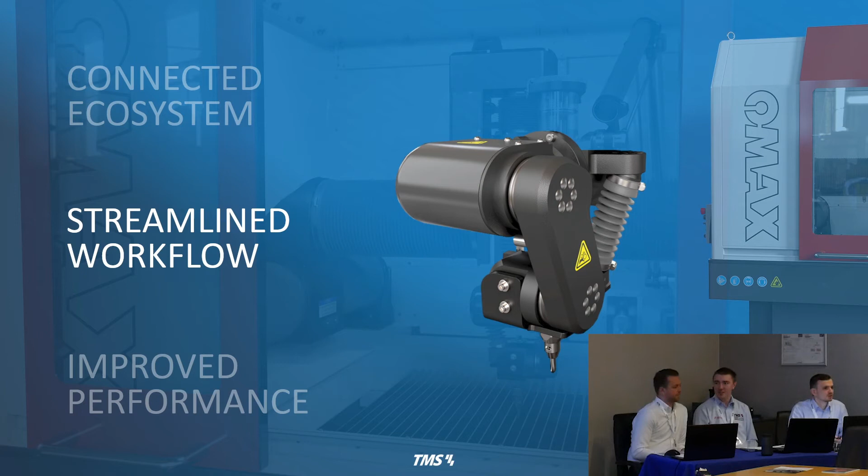Thanks for that, Craig. So yeah, just like Craig said, we're going to take a little jump outside of the core SolidWorks package and have a look at some of the other enhancements and some of the other SolidWorks products as well. And for that, it's all coming under this streamlined workflow.

Now, while I say we're jumping out of the core SolidWorks package, there is one more option that I do want to go through just before we get out of it, which is this 3D Interconnect.

Now, this is something that some of you guys may be familiar with already. It's actually been in SolidWorks since 2017. And basically what it allows you to do is bring in any CAD formats which aren't native SolidWorks files without any need for file translation along the way. So it allows you to pull your assemblies together a lot more quickly, and it's easier to pull them together when you're working with different CAD formats.

But again, we've got a few little enhancements with SolidWorks 2020. So let's have a look at it.

Now, like we said, working with different CAD formats is a critical point when it comes to your assemblies, and we want to try and make this as easy as possible. With SolidWorks 2020, we now have the functionality to finally be able to drag and drop the models directly from Windows File Explorer directly into the graphics area, just like you could with a native SolidWorks file as well.

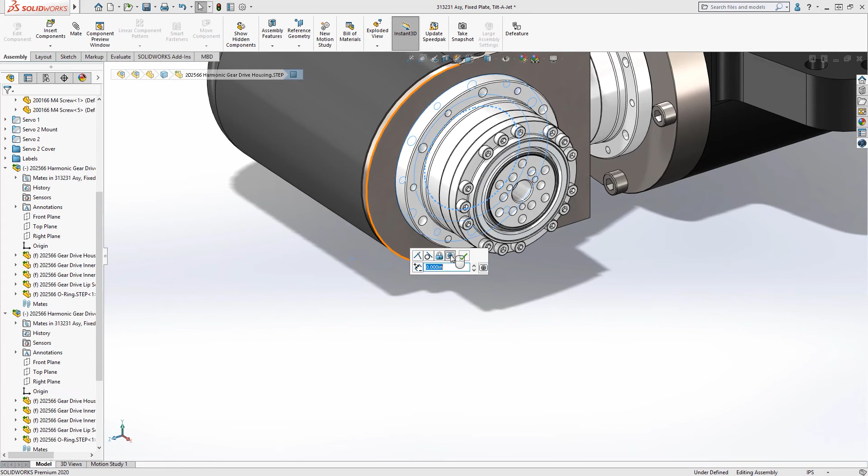Likewise, with SolidWorks 2020, we also have the capability to work with 3D DWGs, DXFs, and even IFC formats as well. So there's just a few different formats that have been added into the compatibility with 3D Interconnect. Again, as I mentioned, it just allows you to pull your assemblies together that little bit quicker when you're working with different data types.

Now, moving on a little bit from core SolidWorks, we're going to go a little bit different with this one, and we're going to look at 3D printing when it comes to SolidWorks.

Now again, we've got some great enhancements in there where we can go ahead and now search in lists when it comes to 3D printing. We can go ahead and generate our slice there, and we can even go ahead and save all this information out to the 3MF format at the end as well.

Now, when it comes to 3D printing, one of the first stages that you need to consider is making sure that the component's actually going to fit in your printing envelope. But before we go ahead and do that, we need to select exactly which printer we want to use.

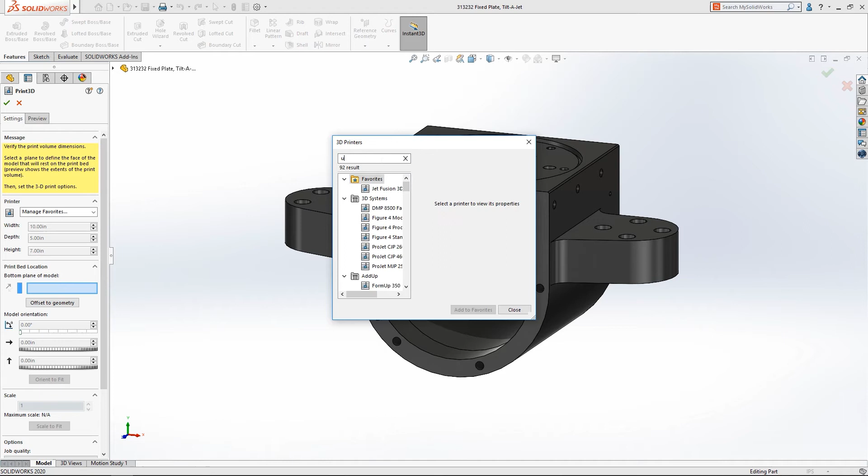Now, what we used to have to do is scroll through this huge list of printers, find the one that you're looking for, and sure enough, you could add it to your favourites. But with SolidWorks 2020, we can go ahead and search for them now instead, and again, still add it to the favourites. Once it's added, we can then go ahead and select them from a simple drop-down, and then we can go ahead and set the component up.

And what you'll notice when we go ahead and select the face we want to reference with this envelope, it highlights any geometry outside the envelope in red. You can then get SolidWorks to go ahead and automatically orientate this to get it to fit in.

And then we can go ahead and have a look at any face which requires support, or any striation, which was brought in 2019. Or what we can now do is go ahead and generate this slice data in there as well. Again, crucial parts when it comes to 3D printing.

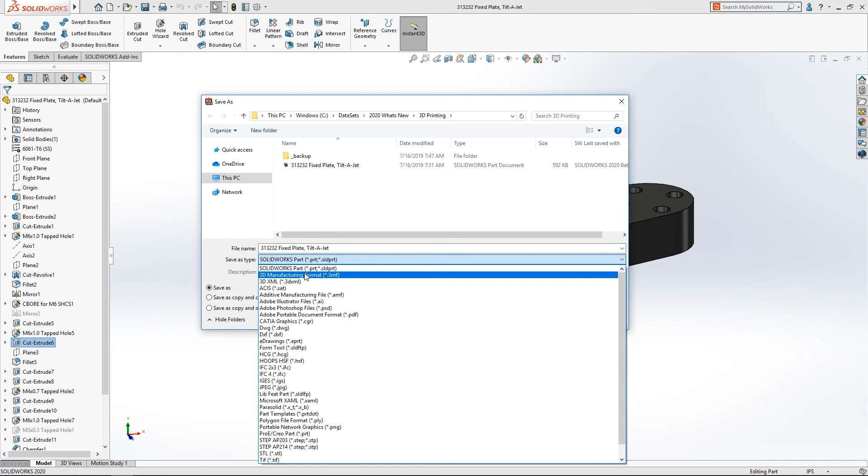But not only that, once we've generated this information, we can go ahead and save this out to that 3MF format. Now, this 3MF format not only saves the geometry out, but also goes ahead and saves out the materials that you want to use, any appearances that you've applied, along with all of that slice data that we calculated as well. So again, it's carrying a bit of intelligence along the way.

Now, if you don't have any 3D printers available to you at work, why not check out the 3D Marketplace, where you can simply upload the model that you want 3D printed, check what materials that you want to use. You can even make a few little modifications on the fly, whether it be colour changes, anything like that, and then at a click of a button, you can go ahead and get some quotes sent directly to you for where you can get these 3D printed and have the part delivered directly to your door. So again, there's a whole other branch out there if you don't have these capabilities in-house.

Moving on to SolidWorks MBD. The enhancements with MBD are mainly about making the user interface more user-friendly, making it a lot easier to pick up if you're starting from scratch. The easiest way to see it is to jump right in.

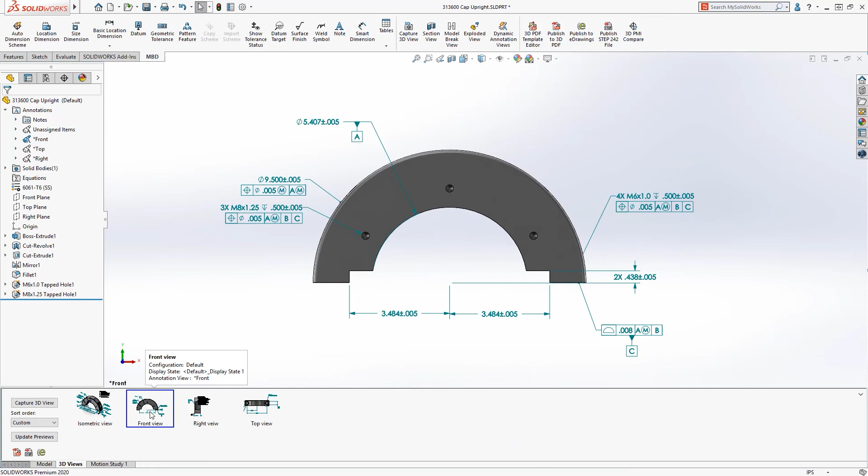For anyone who doesn't know what MBD is, it's basically model-based definition. We can include all of our manufacturing data directly into the 3D model, essentially neglecting the need for any 2D drawings. All this information is saved in these 3D views, or annotation views, and we can look at all of these annotations from our feature tree. We can select each annotation, and it will dynamically highlight in the graphics area so we can see what relates to what.

We can also select one of these annotations and hide or show it, so we can customize these views to make them look exactly the way we want.

With SolidWorks 2020, we also have a new naming convention for these annotations, where it now includes both the feature and the dimension value, making it easier to see from the Feature Manager design tree.

Up until now, all of these annotations have been sorted by the annotation view, but we can now sort them by annotation type as well. So we can look at all of our geometric tolerances, datums, notes, surface finishes, and so on, making it easier to understand what's going on within your model and easier to navigate.

This again allows for faster adoption of MBD.

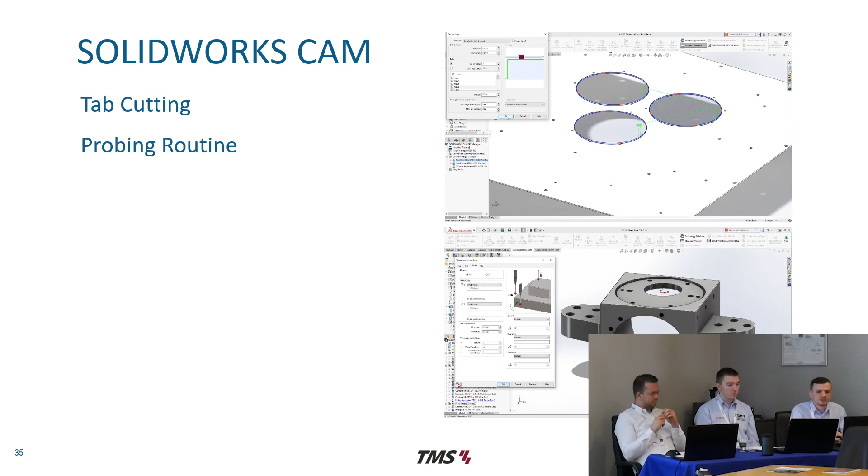Moving on from that, we're now looking at SolidWorks CAM, and there are two major enhancements with SolidWorks 2020: the introduction of tab cutting, and probing routines. The videos really do them justice to explain it, so let's have a look at tab cutting to begin with.

When it comes to specific components being machined, we need to take real care and attention. For example, this little roof panel - if we look at the three discs being cut out here, when we machine this we want to ensure these discs stay attached, because we don't want them coming off, flying away, breaking the machine, or damaging the part.

With the introduction of this new tab setting, we can add in tabs to hold it in place. The user has full control over these tabs, whether it be the lengths, thickness, or spacing, or you can even modify these tabs independently if you want different sizes or lengths for different tabs.

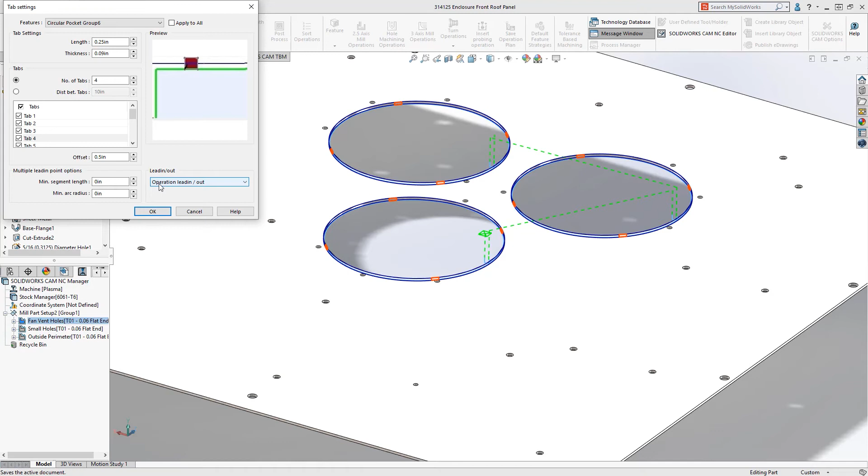Once the user has all the tabs set up exactly the way we want, we can accept those settings, and then regenerate our toolpath. Once generated, we can animate it out, giving full confidence in your manufacturing process and making sure it's doing exactly what you'd expect - instead of adding all that information at the post-processing stage.

Moving on to the probing routine. Again, for specific components, we're going to look at this little housing from the tilt-a-jet. We need really tight tolerancing for these components, and with SolidWorks CAM 2020 professional version, we now have the new incorporation of probing operations.

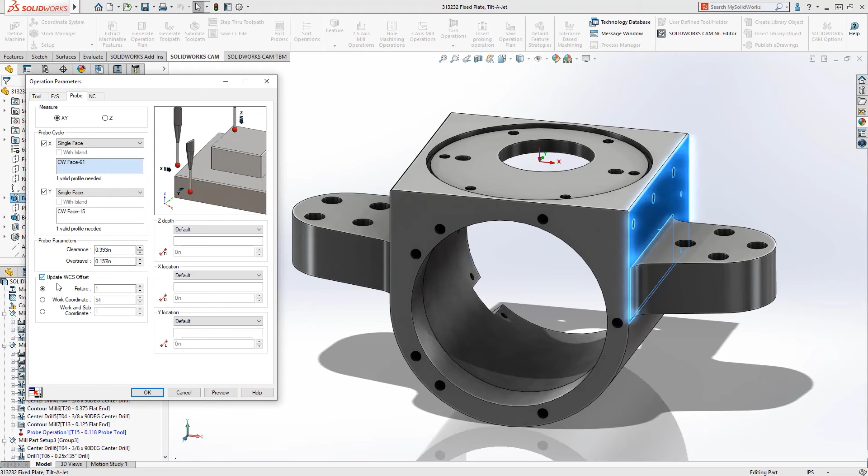This allows you to select the probe tool from your tool crib, then select the surfaces where you want to create new references. Once it does that, it generates a new reference, so any subsequent operations are now working to this new coordinate reference, ensuring they work to that tighter tolerance.

Likewise, we can regenerate our toolpath, and just like with the tabs, we can animate that out, giving us full confidence that what we've set up is what we're trying to achieve.

So that pretty much covers the enhancements for CAM 2020.

Moving on to Composer, we finally have some great enhancements, some much needed if you use it at the moment. The main one, and again I have my favourites in this section, is the ability to finally save animations out as MP4s. On top of that, we also have the addition of reusing any named or exploded views in Composer, and we can even save out 360-degree raster or vector images as well.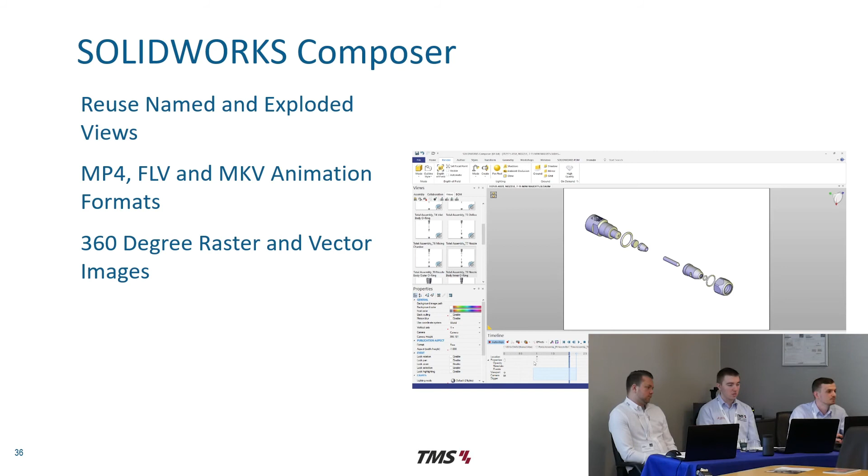Let's have a look at it. Now this is a little nozzle from the Omax water jet, essentially designed to minimise any waste when going through this machine process.

That's essentially the technique or methodology SolidWorks have been going with the Composer enhancements, trying to minimise the waste of your time with these operations. So for example, you can see we've got some views set up here, and we've even got a few exploded views as well. These are the exact views I want to reuse when creating my Composer animation.

So if we jump into Composer, I'm going to open up my model. What you'll notice is we now have the option to import these exploded views and named views, again saving the time of recreating them. You can then simply drag and drop them onto my timeline, and before you know it, you've got a little animation all ready to go.

Once we've got it set up, we can go ahead and save that out, and like we saw, we now have that new MP4 format in there.

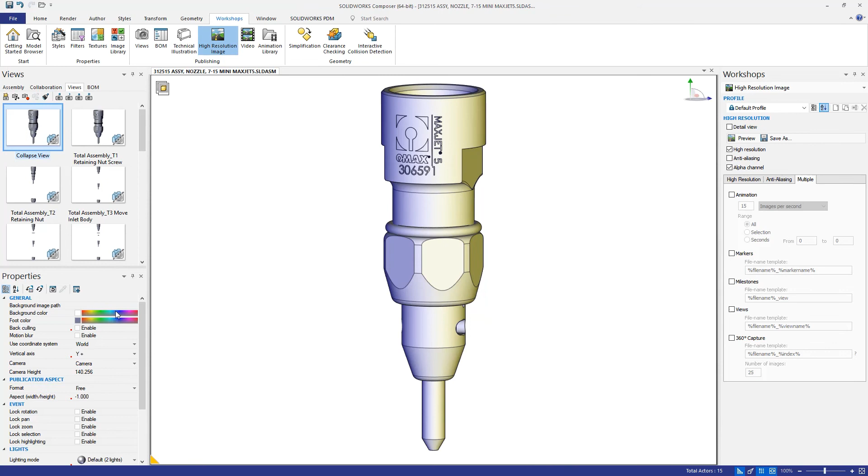Lastly, for this component, I want to save an image out to use for some marketing material, but I'm not 100% sure on the angle I want. So now we can save out this 360 raster or vector image, which essentially saves out images at multiple angles. You can then flick through them and see which one you think's best, making it quicker and easier to make these decisions instead of setting up each view individually.

So again, the principle behind it is to eliminate waste by creating technical publication. Essentially, it's not wasting your time.

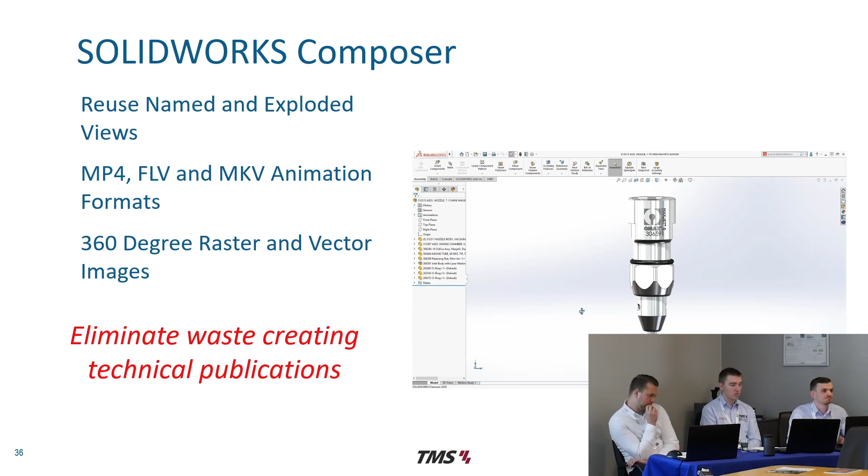Now that leads us on nicely to one of our guests up here. I'm just going to get Gordon up to have a little session on SolidCAM. My name's Gordon Drysdale, and I'm from SolidCAM.

I want to talk to you about SolidCAM today. It's a fully integrated CADCAM package for SolidWorks, meaning you never actually leave SolidWorks. It's been around since 1984, and we're now selling in 50 countries. When we first started, we did our own CAD system because SolidWorks didn't exist then.

As SolidWorks became available in the late 90s, we developed an interface to it, and by 2003 we became a gold partner. I think we were pretty well one of the first gold partners. Gold partnership means it's the highest level of integration you have inside SolidWorks.

So you're working inside SolidWorks. It makes it easy to learn and use because you're sharing the SolidWorks tools you already know. You never actually leave SolidWorks, so it's the same interface all the time, just one more tab added to the window down there. So there's no data translation, no conversion errors, no missing data. You design the model without leaving SolidWorks and continue on to add your toolpath.

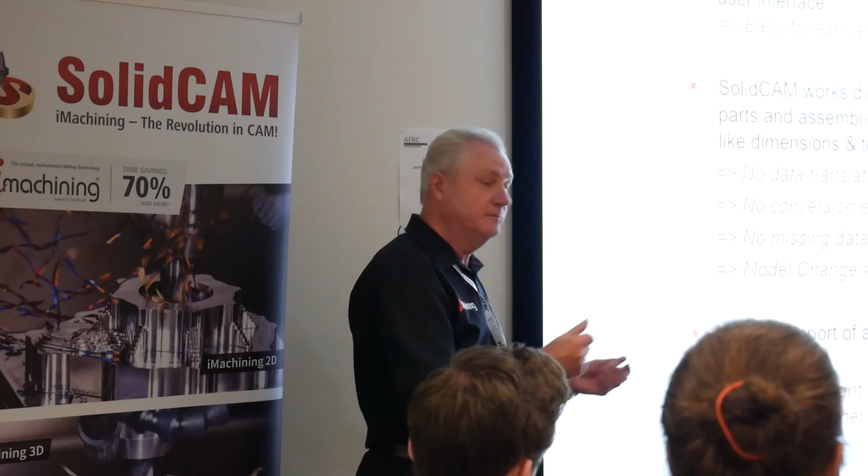If you then make a model change, let's say the design department is different to the production department and they make a model change, that comes down to you, SolidCAM recognises the model's changed and asks, would you like to update the toolpath? Done. Obviously, because you're working inside SolidWorks, you've got all the standards there for importing other CAD models.

So the modules themselves: we've got 2.5D milling, which is basically holes, slots, pockets, facing operations, and 3D milling, which is more surface type work.

Multi-axis milling, simultaneous 5-axis, where you've got the head and the table moving simultaneously to machine a complex part. Turning, mill turn, and our latest module is the Swiss type, which I'll show you in a little while.

Our biggest USP is working inside SolidWorks. But our biggest manufacturing USP is the iMachining module. iMachining is basically fast metal removal.

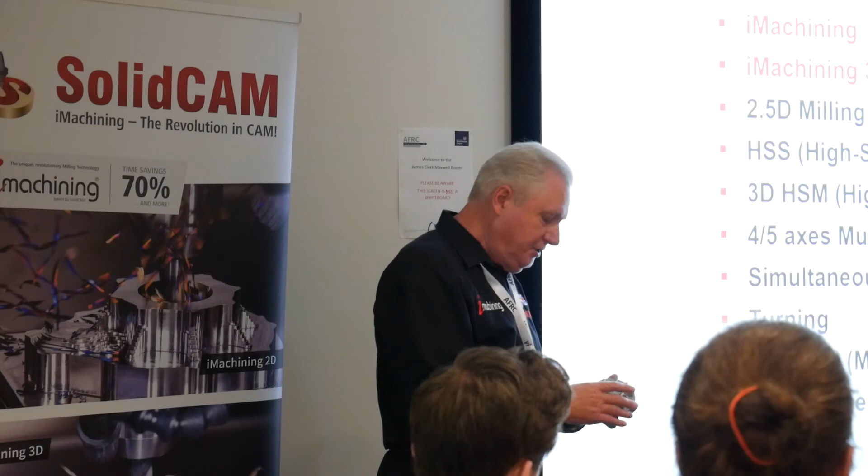Traditionally, when machining parts with intricate corners, you'd go in with a small tool and machine in small depths so you don't bury the tool and break it. What iMachining does is you tell it the maximum angle of cut, say 45 degrees, and that tool would never over-engage, so it would morph its way into the corner. That enables you to cut deeper, which means you're cutting faster.

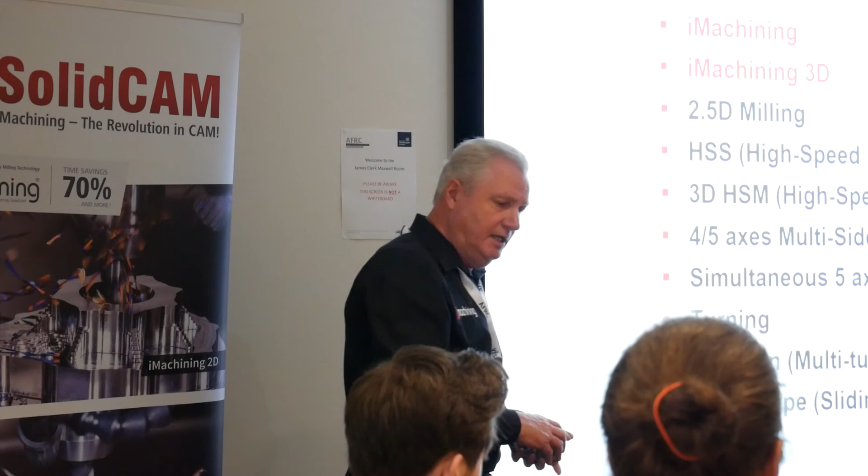There's two versions of it. 2D iMachining, which is basically slots, things like that. And then you've got 3D iMachining. Typically with 3D machining, you tend to start from the top and slice it down. 3D iMachining goes to the bottom first and removes the bulk of the material, meaning it's cutting much, much faster.

This is our technology centre in South Yorkshire. You may ask, why do we have a technology centre when we sell software? We make some fairly bold claims about iMachining - we say it's the fastest metal removing CAM package on the marketplace. If I just tell you that, you perhaps wouldn't believe it, but if I bring you down to the centre and show it to you, then you'll believe it.

So we hold regular seminars in the centre and basically show people the software. We have partners there working with tooling, work holding, coolant, all manner of things associated with the manufacturing process. We have mini exhibitions at the same time, and also hands-on for all the software so people can play around with SolidCAM and have a look how it works.

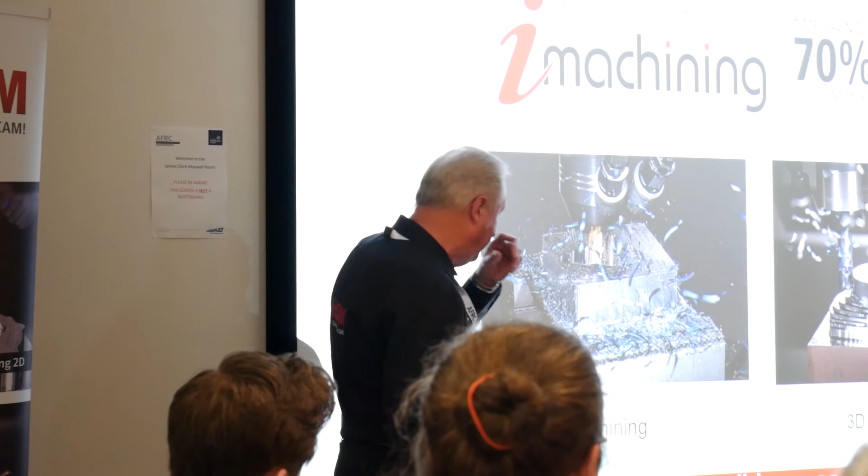So as I said, we've got the iMachining, which we're going to show in a little video. There's the 2D version - you can see all the chips are exactly the same, it maintains a chip thickness all the way around. 3D iMachining has gone to the bottom first and works its way back up again. I have some more videos out there if you want to come and have a look at them.

So this is a part we actually machined last week, which is this particular part. This is what the user would see as the simulation, and that's the view of it inside being machined. It's not aluminium, it's EN24, so it's a fairly hard material.

You see that tool is being cut at full depth. The benefit of cutting at full depth means you're not just cutting with the tip of the tool - it means the tool is using the full flute length, therefore the tool lasts a lot longer as well. I think it cuts this particular side in about 10 minutes, which is fairly quick for a part of that complexity.

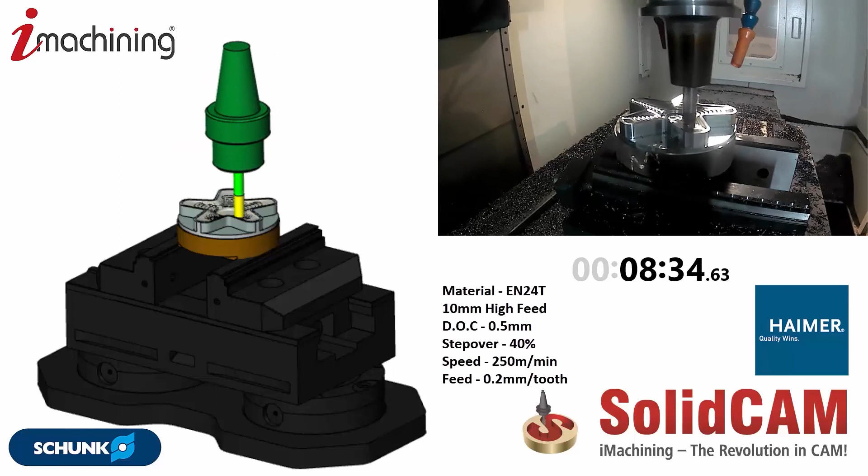Okay, so now we're in Op 2, which is this side, which is a bit more complicated. There's no shock to the tool, there's no additional load to the machine either. Again, you can see it cutting at full length.

Now how it does that is we have a wizard within iMachining, and it needs 3 pieces of information: the spindle power, the material you're cutting, and the tool material. Once it knows those 3, it works out the speeds and feeds, and it adapts them all the time - it's not a constant speed and feed. See, we're out the corner there now, and it's morphing its way in at full depth. If you did that with a standard cutting path, it would break the tool, or you'd have to cut it in smaller depths.

And there's your part.

This is our latest module, which is the Swiss type. Basically, it's sliding head machines, which are very complicated machines, typically for medical type parts. This one's on a Star machine.

The concept is that you've got tools coming from all different angles, cutting different sections. So there's the machine simulation - we would have the whole machine modelled up inside SolidCAM, so you can see all the kinematics of the machine movement and all the channel movement.